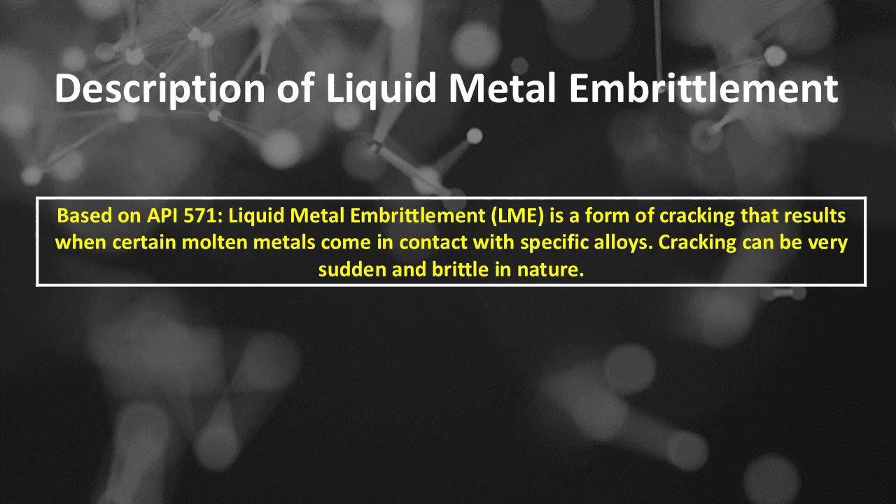Liquid metal embrittlement or LME damage mechanisms as a part of environment-assisted cracking. Description of liquid metal embrittlement damage mechanisms based on API 571. Liquid metal embrittlement or LME is a form of cracking that results when certain molten metals come in contact with specific alloys. Cracking can be very sudden and brittle in nature. Here's a comprehensive and detailed description of liquid metal embrittlement or LME damage.

Introduction. Liquid metal embrittlement is a type of environmentally assisted cracking that occurs when certain ductile metals or alloys become brittle and fracture rapidly due to the presence of specific liquid metals. Unlike traditional corrosion, which involves material degradation over time, LME involves a sudden loss of ductility and strength, leading to brittle failure.

Fundamental mechanisms of liquid metal embrittlement or LME. Number 1 is conditions for LME: susceptible material, usually ductile metals such as steels, aluminum alloys, copper alloys, nickel alloys, or titanium. Liquid metal environment, a specific liquid metal that interacts with the susceptible metal, such as mercury, zinc, cadmium, bismuth, lead, or tin.

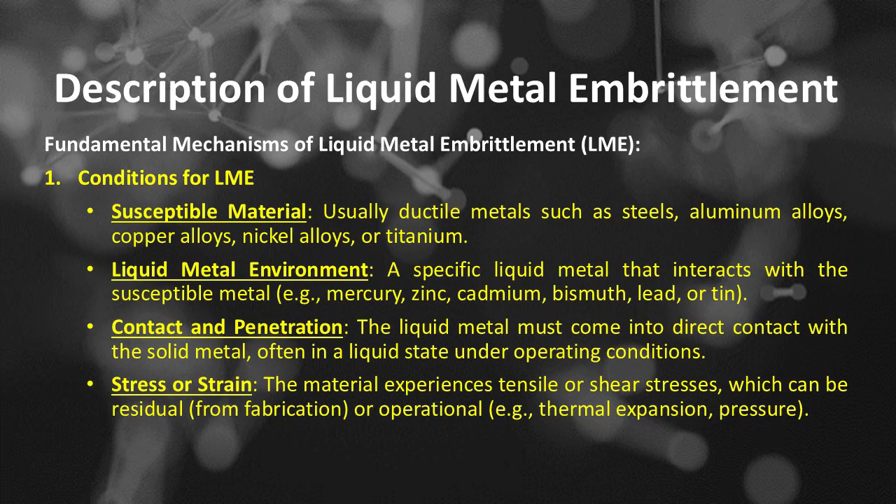Contact and penetration. The liquid metal must come into direct contact with the solid metal, often in a liquid state under operating conditions, stress or strain. The material experiences tensile or shear stresses, which can be residual, from fabrication, or operational, such as thermal expansion, pressure.

Number 2 is embrittlement process, wetting and penetration. The liquid metal wets the susceptible metal's surface and infiltrates along grain boundaries or existing flaws. Grain boundary weakening. The liquid metal segregates preferentially at grain boundaries, reducing cohesive strength. Brittle fracture. Under stress, the weakened boundaries facilitate rapid crack initiation and intergranular fracture, often with minimal plastic deformation.

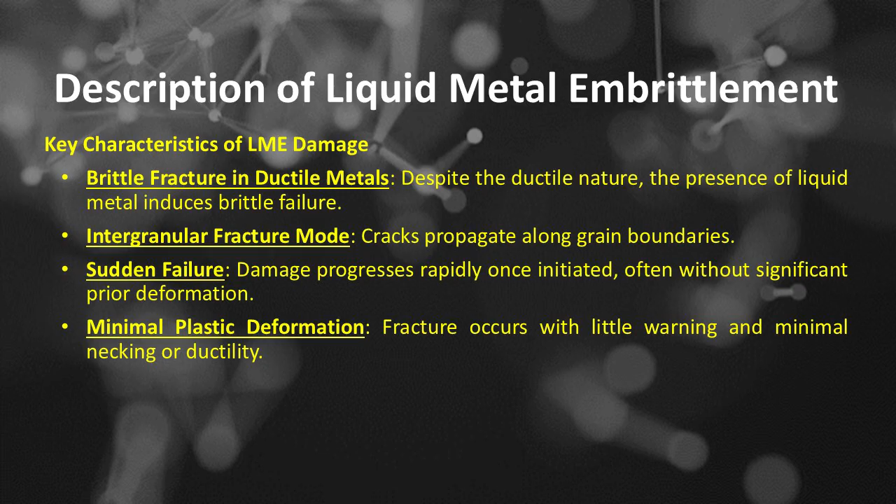Key characteristics of liquid metal embrittlement damage. Brittle fracture in ductile metals. Despite the ductile nature, the presence of liquid metal induces brittle failure. Intergranular fracture mode. Cracks propagate along grain boundaries. Sudden failure. Damage progresses rapidly once initiated, often without significant prior deformation. Minimal plastic deformation. Fracture occurs with little warning and minimal necking or ductility.

Common materials and liquid metals involved in liquid metal embrittlement are the following. Susceptible materials. Number 1 is steels and or stainless steels with common liquid metals are mercury, zinc and cadmium. Its typical environments are chemical plants, thermometers, dental amalgams. Susceptible materials. Number 2 is aluminum alloys with common liquid metals are mercury and zinc. Its typical environments are manufacturing, aerospace.

Susceptible materials. Number 3 is copper alloys with common liquid metals are mercury and zinc. Its typical environments are electronics, plumbing. Susceptible materials. Number 4 is nickel alloys with common liquid metals are mercury and lead. Its typical environments are nuclear reactors, chemical processing. Susceptible materials. Number 5 is titanium alloys with common liquid metals are mercury and bismuth. Its typical environments are marine, aerospace.

Factors influencing liquid metal embrittlement includes, number 1 is material microstructure, grain size, purity, and heat treatment influence susceptibility. Number 2 is liquid metal composition, purity and wetting characteristics affect infiltration. Number 3 is stress state, higher tensile stresses promote crack initiation. Number 4 is temperature. Elevated temperatures can enhance wetting but may also influence diffusion rates. Number 5 is exposure duration, longer contact increases risk of infiltration and damage.

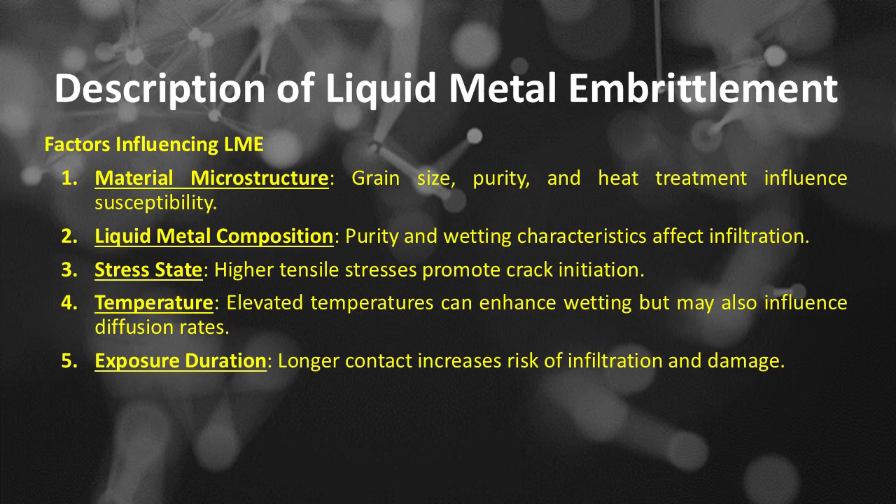Liquid metal embrittlement mechanistic details includes, number A, wettability. The liquid metal must wet the solid metal surface, which depends on surface energy and temperature. Good wettability facilitates infiltration along grain boundaries. Number B, segregation and penetration. The liquid metal penetrates microstructural features, especially grain boundaries, cracks, or inclusions. Segregation weakens the cohesive strength of boundaries, lowering fracture resistance.

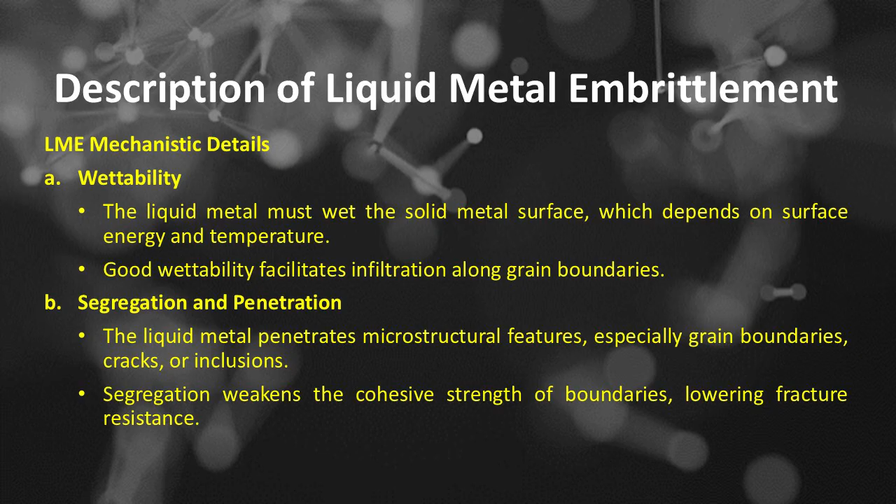Liquid metal embrittlement mechanistic details. Number C, crack initiation and propagation. Initiation often occurs at microstructural flaws, inclusions, or residual stresses. Once initiated, cracks propagate rapidly along grain boundaries, leading to brittle fracture.

Manifestations and damage features of liquid metal embrittlement includes intergranular fracture surface, characteristic appearance with brittle, granular features along grain boundaries, crack nucleation sites, microstructural flaws, inclusions, or areas of residual stress. Sudden failure, no significant prior warning, failure occurs rapidly once critical penetration occurs.

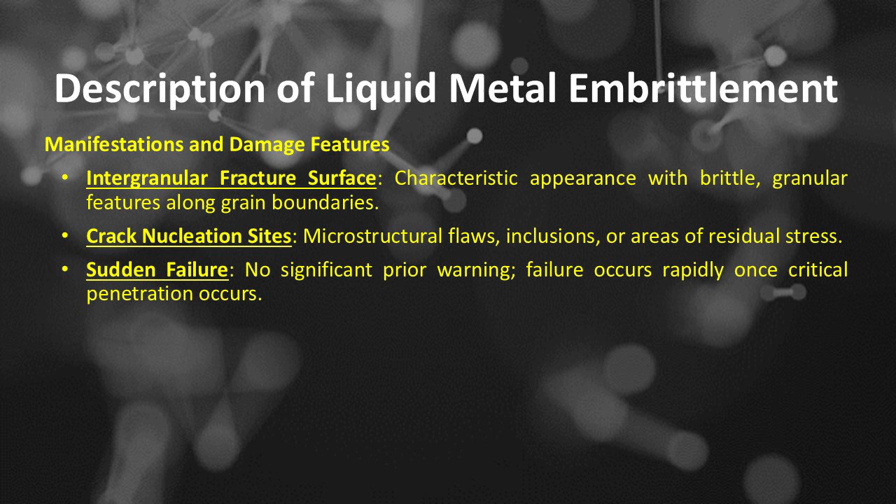Detection and identification method for liquid metal embrittlement includes but not limited to: number 1 is fractographic analysis. Examination of fracture surfaces reveals intergranular brittle features characteristic of LME. Number 2 is microscopy. SEM, scanning electron microscopy, can identify grain boundary infiltration and microstructural features. Number 3 is chemical analysis. Energy dispersive X-ray spectroscopy, EDS, can detect liquid metal residues at crack sites. Number 4 is non-destructive testing. NDT ultrasonic testing, radiography, or dye penetrant may detect subsurface or surface flaws.

Prevention and control measures for liquid metal embrittlement include but are not limited to: number 1, material selection. Use materials resistant to LME, such as avoiding susceptible alloys and selecting compatible metals.

Number 2 is environmental control. Minimize contact with liquid metals, employ barriers or coatings.

Number 3 is design modifications. Reduce residual stresses, avoid sharp corners, and implement stress relief.

Number 4 is operational controls. Limit exposure time and temperature in environments containing liquid metals.

Number 5 is inspection and monitoring. Regular inspections, especially after exposure, to detect early crack formation.

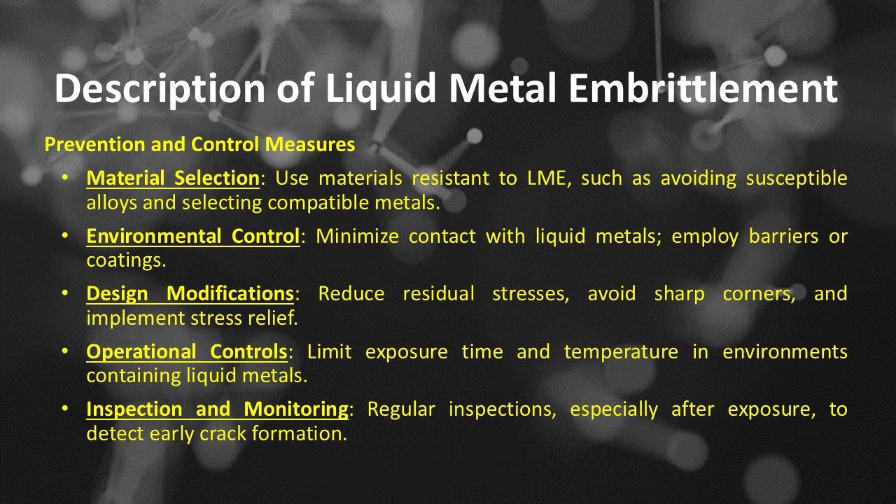Liquid metal embrittlement, or LME, is a damaging phenomenon where certain ductile metals become brittle and fracture rapidly when they come into contact with specific liquid metals under stress. It involves infiltration of liquid metal along grain boundaries, weakening the microstructure, and leading to intergranular brittle failure with minimal plastic deformation.

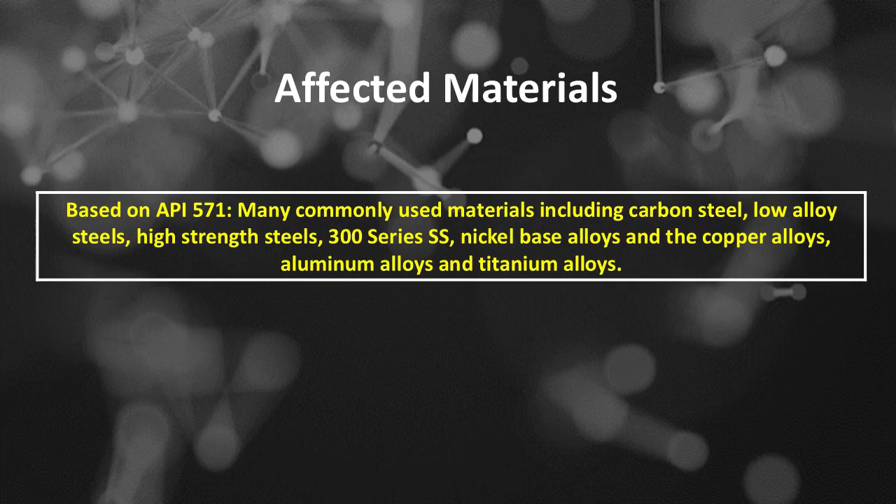Understanding the specific susceptible materials, liquid metals involved, environmental factors, and microstructural conditions is essential for preventing and managing LME damage. Liquid metal embrittlement affected materials based on API 571: many commonly used materials including carbon steel, low alloy steels, high-strength steels, 300 series SS, nickel base alloys, copper alloys, aluminum alloys, and titanium alloys.

Here's a detailed explanation of materials affected by liquid metal embrittlement, or LME. Introduction: LME is a phenomenon where certain ductile metals or alloys become brittle and fracture suddenly upon exposure to specific liquid metals under stress. Not all materials are susceptible. The likelihood of LME depends heavily on the material's microstructure, composition, and environmental interactions.

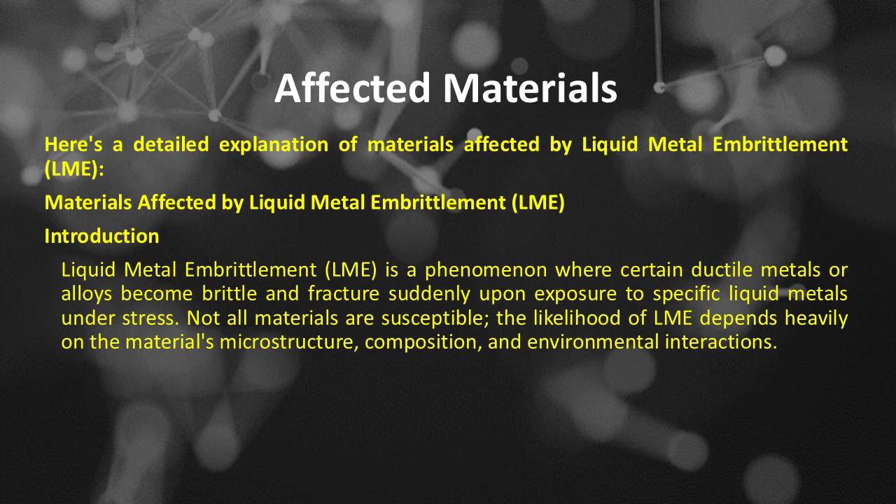Primary materials affected by liquid metal embrittlement include: number 1, steels, including carbon steels and stainless steels. Steel susceptibility: many steels, especially high-strength, low-ductility variants, are vulnerable. Austenitic stainless steels, like 304, 316, can be susceptible under certain conditions.

The mechanism of liquid metal embrittlement in steel materials: liquid zinc, mercury, or cadmium can infiltrate along grain boundaries, causing intergranular brittle failure. High residual stresses or tensile stresses exacerbate susceptibility.

Primary materials, number 2, is aluminum alloys. Its susceptibility includes aluminum alloys, particularly those with high purity or certain microstructures, can be affected. Mercury is a common liquid metal involved. The mechanism of liquid metal embrittlement in aluminum alloys: mercury wets aluminum surfaces, infiltrates grain boundaries, leading to embrittlement.

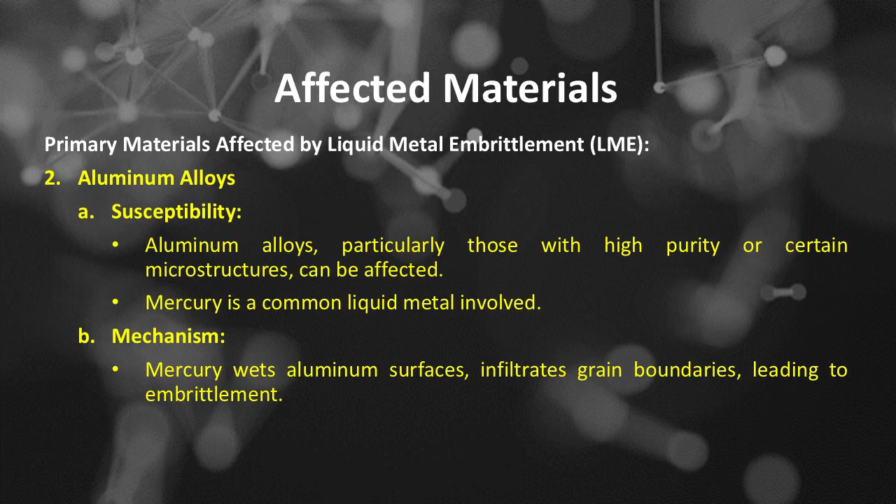Primary materials, number 3, is copper and copper alloys. Its susceptibility includes copper, brass, and bronze alloys, which are vulnerable to mercury-induced embrittlement. Applications of copper and copper alloys are mostly in plumbing, electrical components, and decorative items. The mechanism of liquid metal embrittlement in copper and copper alloys: mercury penetrates along grain boundaries, causing intergranular fractures.

Primary materials, number 4, is nickel and nickel-based alloys. Its susceptibility includes certain nickel alloys, especially those with high purity or specific microstructural features, which can be susceptible to mercury or cadmium LME. Applications of nickel and nickel-based alloys are mostly in nuclear reactors and chemical processing equipment. The mechanism of liquid metal embrittlement in these alloys, similar to steels, is infiltration along grain boundaries which weakens the structure.

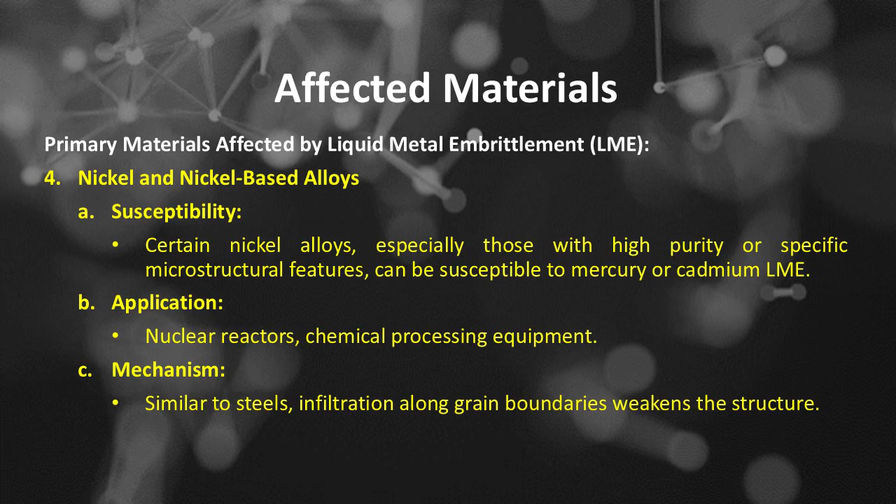Primary materials, number 5, is titanium and titanium alloys. Its susceptibility includes being less commonly affected, but it can occur in environments with mercury or other liquid metals. Applications of titanium and titanium alloys are mostly in marine environments and aerospace components.

Here are additional factors influencing material susceptibility. The first is microstructure factors: fine-grained materials tend to be more susceptible because grain boundaries provide pathways for infiltration. The presence of microstructural flaws, inclusions, or residual stresses increases risk.

The second is material purity: high-purity materials with fewer grain boundary precipitates are more vulnerable, and alloying elements can influence wettability and infiltration. The third is stress state: applied tensile stresses or residual stresses can promote crack initiation and propagation in susceptible materials.

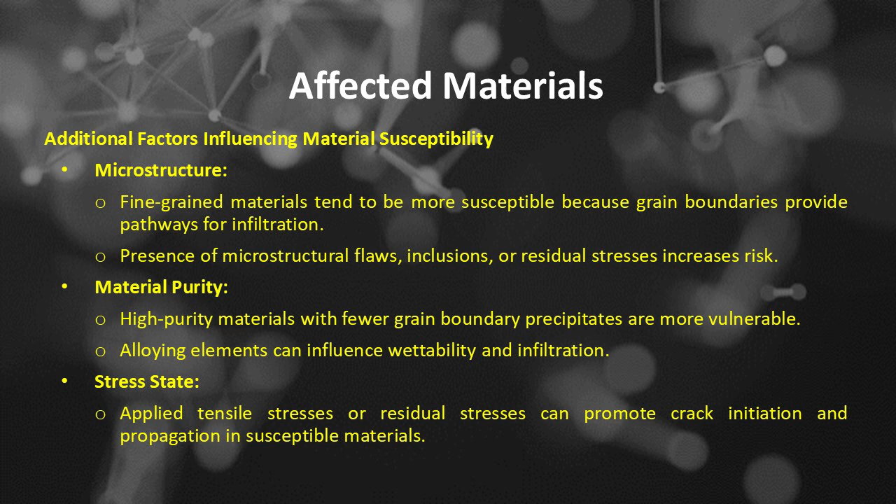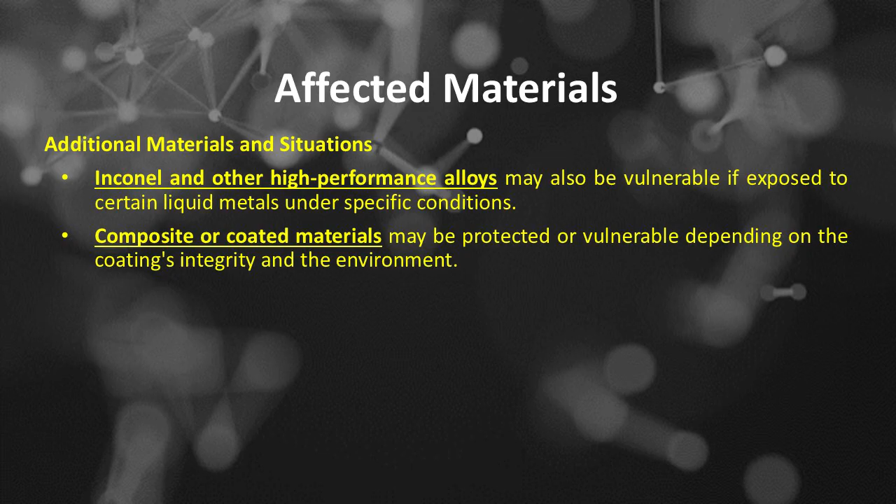Additional materials and situations include: Inconel and other high-performance alloys may also be vulnerable if exposed to certain liquid metals under specific conditions. Composite or coated materials may be protected or vulnerable depending on the coating's integrity and the environment.

In essence, the primary materials susceptible to LME are ductile metals and alloys that have microstructures with abundant grain boundaries, are in contact with specific liquid metals like mercury, zinc, cadmium, lead, bismuth, or tin, and experience tensile stresses, residual stresses, or environmental conditions favoring infiltration. Understanding the susceptibility of these materials is vital for designing systems to prevent LME damage, such as avoiding exposure to liquid metals, applying protective coatings, or selecting alternative materials.

Liquid metal embrittlement, or LME, damage mechanisms.

Critical factors based on API 571: A, LME occurs in very specific combinations of metals in contact with low melting point metals such as zinc, mercury, cadmium, lead, copper, and tin. Typical combinations of industrial significance are shown in Table 4-9.

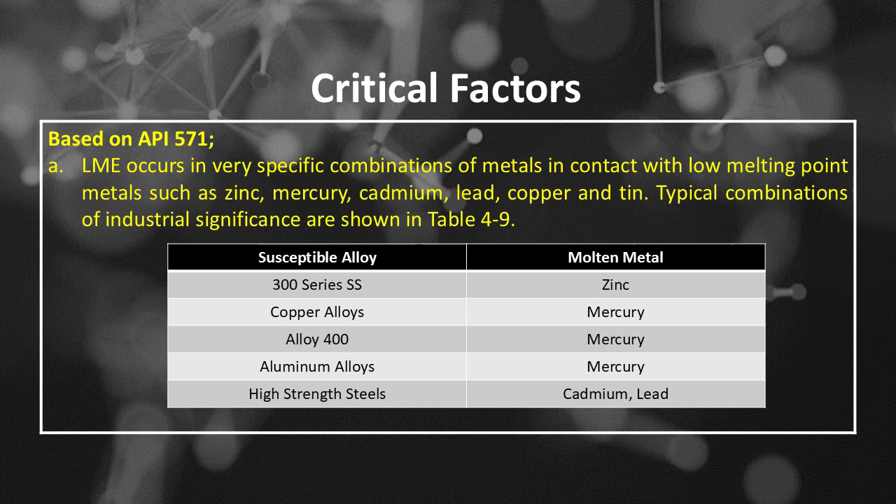300 series SS susceptible to LME when combined with zinc as molten metal. Copper alloys susceptible to LME when combined with mercury. Alloy 400 susceptible to LME when combined with mercury. Aluminum alloys susceptible to LME when combined with mercury. High-strength steel susceptible to LME when combined with cadmium and/or lead as molten metal.

B, high tensile stress promotes cracking. However, cracking can initiate simply through contacting the molten metal with the susceptible alloy. Very small quantities of the low melting point metal are sufficient to cause LME.

C, tensile stress contributes to crack propagation rates. Cracking under load can be extremely rapid such that cracks may pass through the wall within seconds of contact with the molten metal. D, cracking can occur after long periods of time when contaminated surfaces are exposed to liquid metals. E, a susceptible metal in contact with a low melting metal at low temperatures may crack later when the temperature rises above the melting temperature of the low melting alloy.

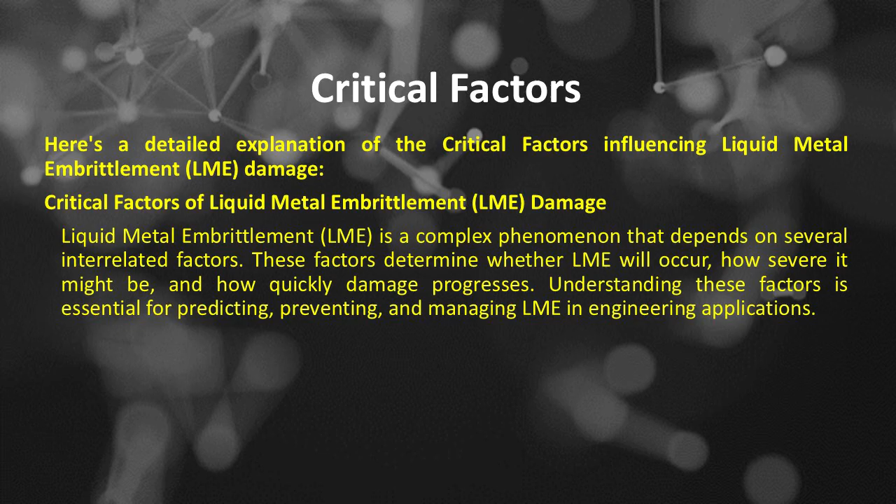Here's a detailed explanation of the critical factors influencing liquid metal embrittlement, or LME damage. Liquid metal embrittlement is a complex phenomenon that depends on several interrelated factors. These factors determine whether LME will occur, how severe it might be, and how quickly damage progresses. Understanding these factors is essential for predicting, preventing, and managing LME in engineering applications.

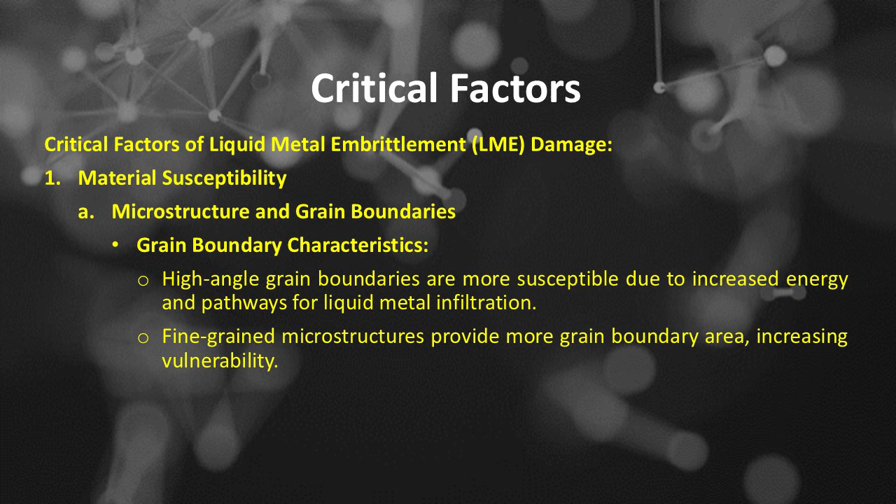Critical factors of liquid metal embrittlement. Number 1, material susceptibility, includes A, microstructure and grain boundaries. High-angle grain boundaries are more susceptible due to increased energy and pathways for liquid metal infiltration. Fine-grained microstructures provide more grain boundary area, increasing vulnerability.

Microstructural defects such as inclusions, microvoids, or residual stresses at grain boundaries facilitate crack initiation. Microstructural heterogeneities can act as sites for liquid metal segregation.

B, material composition and purity. Alloy composition: certain alloying elements can either inhibit or promote wetting and infiltration. For example, high-purity metals may be more susceptible due to fewer impurities blocking infiltration pathways.

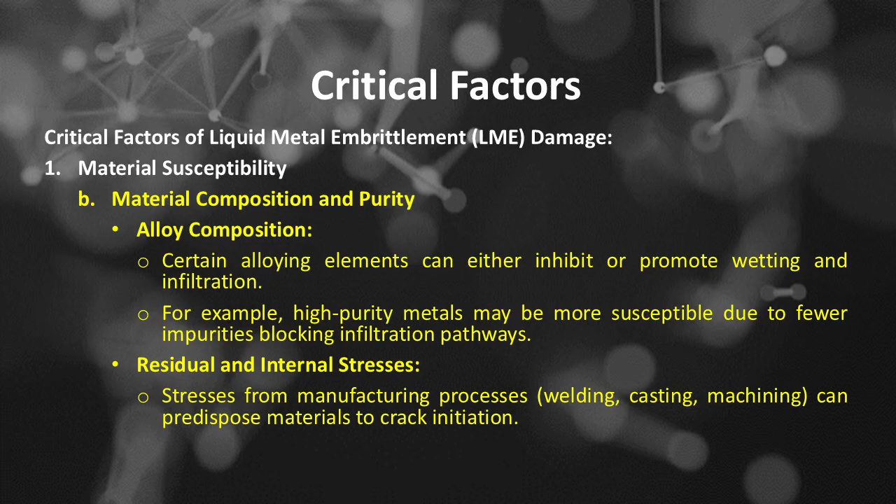Residual and internal stresses from manufacturing processes—welding, casting, machining—can predispose materials to crack initiation. Mechanical properties include ductility and toughness: less ductile, high-strength materials are more prone to brittle fracture once embrittled. Hardness and strength: higher strength can localize stresses at microstructural flaws, aiding crack nucleation.

Critical factors of LME damage. Number 2, type and properties of the liquid metal. A, wetting behavior: wettability, the ability of the liquid metal to spread over and adhere to the solid metal surface, is crucial. Good wettability ensures infiltration along grain boundaries. Surface tension: lower surface tension promotes wetting and penetration.

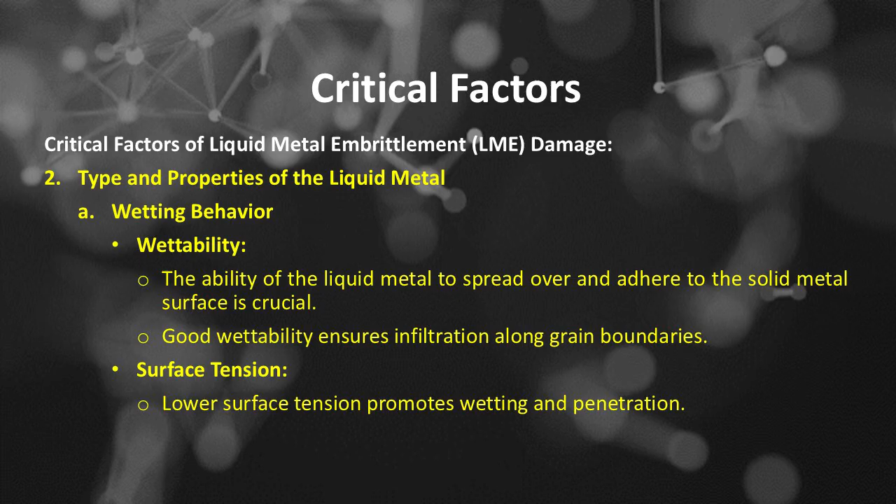Type and properties of the liquid metal. B, chemical compatibility and segregation tendency. The liquid metal's chemical affinity for the solid influences infiltration. For example, mercury readily wets aluminum and steels, making them more vulnerable.

C, melting point and viscosity, temperature dependence. Elevated temperatures improve wetting but also increase diffusion rates. Liquid metals with low melting points or that are liquid at operating temperatures can infiltrate more easily.

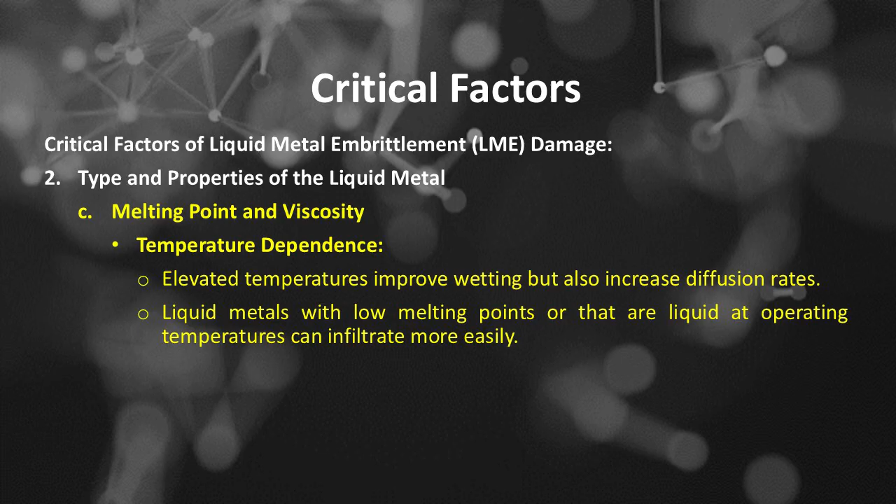Critical factors of LME damage. Number 3, environmental and operating conditions, includes A, temperature. High temperatures enhance wetting and infiltration but can also accelerate diffusion of liquid metal into grain boundaries. Temperature gradients and differential thermal expansion can induce stresses, promoting crack initiation.

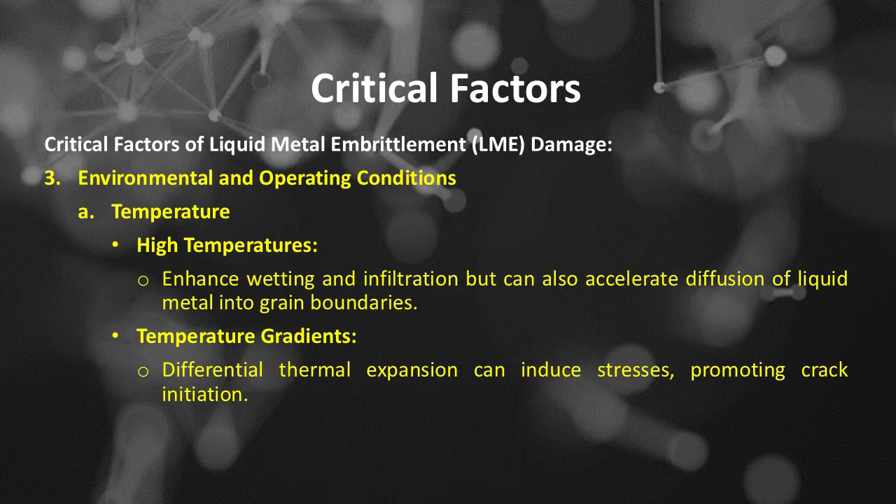Environmental and operating conditions factors. B, mechanical stress: applied tensile stress is essential for crack propagation. Stress helps open grain boundaries for infiltration. Residual stress remaining from manufacturing or fabrication processes can predispose to LME.

Environmental and operating conditions factors. C, stress state: tensile versus compressive. Tensile stresses favor crack initiation and growth, while compressive stresses generally inhibit crack propagation. D, exposure duration: longer exposure to liquid metal increases infiltration depth, weakening the microstructure and increasing fracture risk.

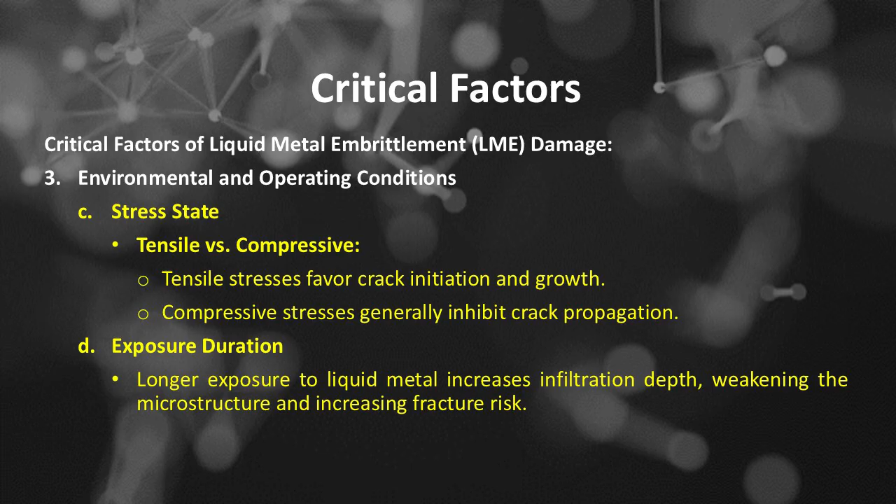Critical factors of LME damage. Number 4, microstructural and external factors, includes A, surface condition: surface roughness, oxidation, or coatings can influence wettability and infiltration. Corroded or oxidized surfaces may either hinder or promote infiltration depending on the chemistry.

Microstructural and external factors. B, presence of microstructural flaws, microcracks, voids, or inclusions act as initiation sites where liquid metal can penetrate. C, alloying elements and impurities. Certain impurities can either block or facilitate infiltration. For example, oxide layers may act as barriers or pathways for infiltration depending on their nature.

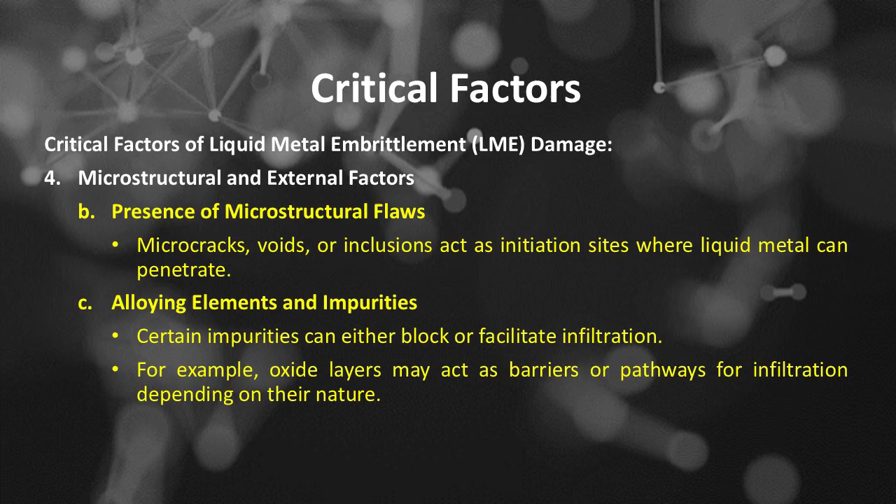The critical factors influencing LME damage are interdependent. The likelihood and severity of embrittlement depend on the combined effects of material susceptibility, the properties of the liquid metal, environmental conditions, and mechanical stresses. Altering or controlling these factors, such as material selection, environment, stress management, and surface treatments, can effectively mitigate the risk of LME-induced failures.

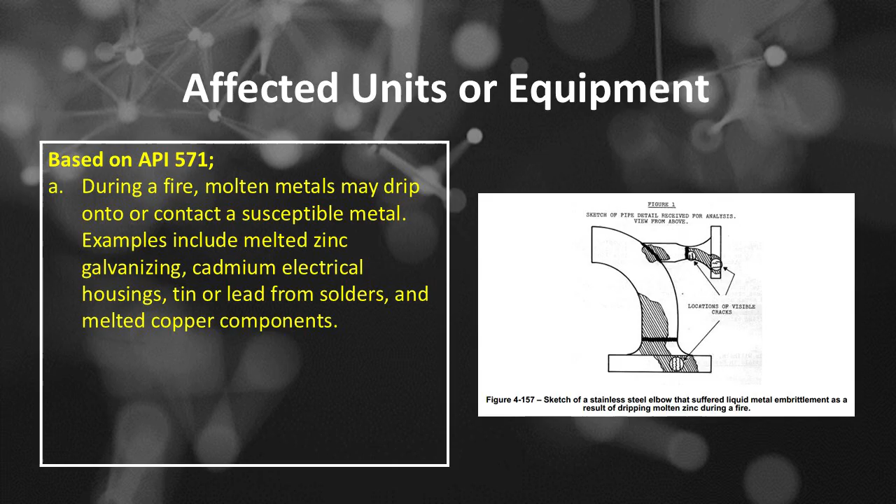Liquid metal embrittlement damage affected units or equipment based on API 571. A, during a fire, molten metals may drip onto or contact a susceptible metal. Examples include melted zinc galvanizing, cadmium electrical housings, tin or lead from solders, and melted copper components.

B, LME can occur in any location where the LME couples are found. A common example is 300 series SS piping or vessels in contact with, or previously rubbed against, galvanized steel.

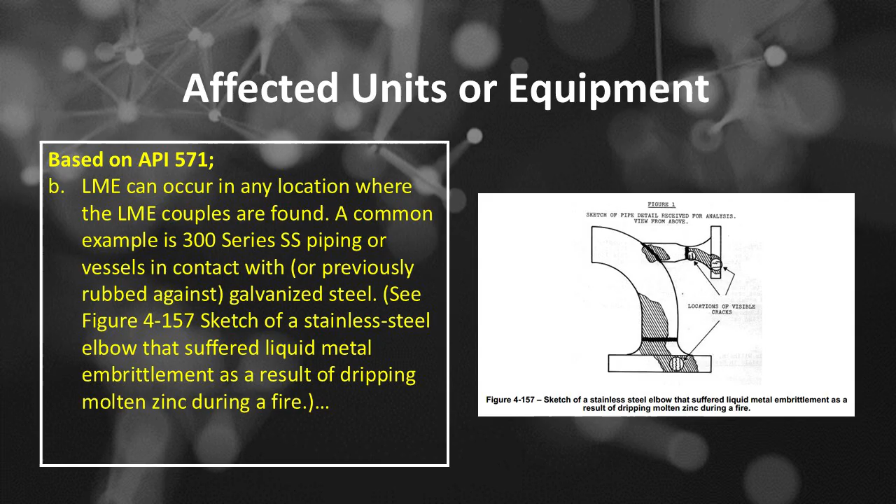C. In refineries, mercury is found in some crude oils and can condense in the atmospheric tower overhead system, thereby embrittling brass, alloy 400, titanium or aluminum exchanger components.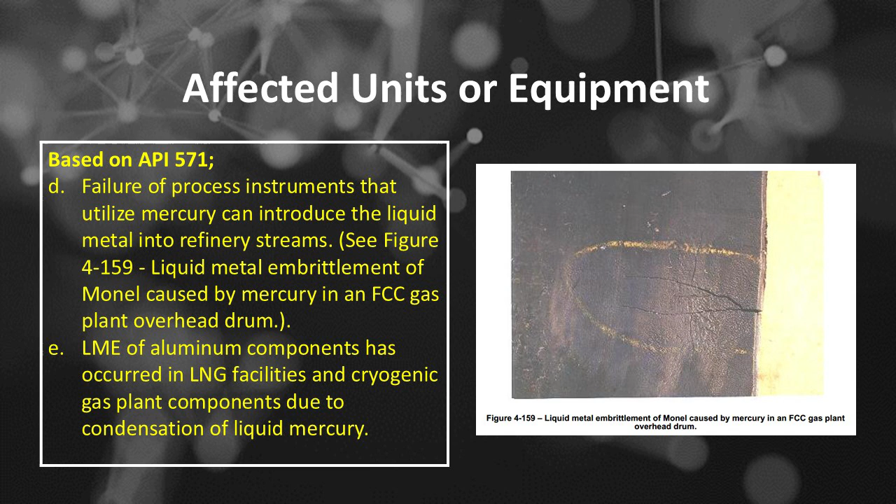E. LME of aluminum components has occurred in LNG facilities and cryogenic gas plant components due to condensation of liquid mercury. Here's a detailed explanation of the units or equipment affected by liquid metal embrittlement, LME, damage.

LME can compromise a wide range of industrial units and equipment, especially those involving the contact of susceptible materials with liquid metals under stress. The specific equipment affected depends on the operational environment, materials used, and exposure conditions.

Affected units and equipment in liquid metal embrittlement, LME, damage, includes: 1, nuclear reactor components, includes A, fuel cladding and structural materials such as metal tubes, plates, or structural elements that contain or support nuclear fuel. Materials used commonly: stainless steels, zirconium alloys, or other high-strength alloys.

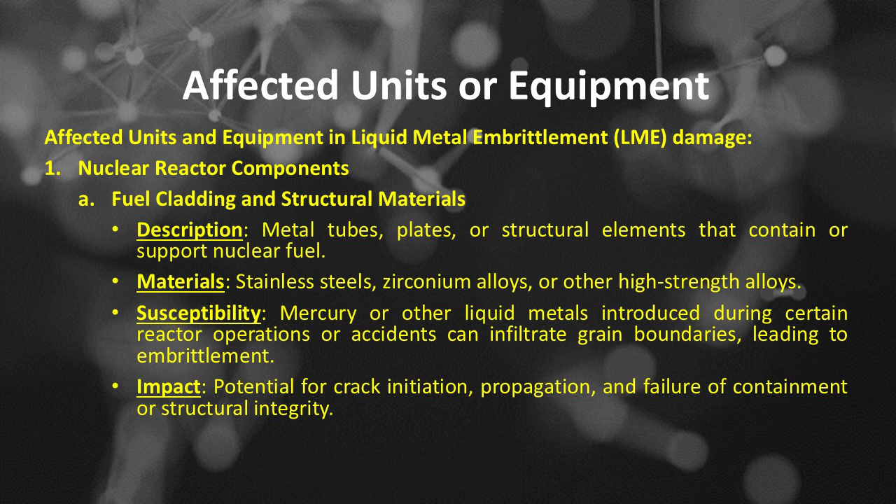Fuel cladding and structural susceptibility for these materials would be mercury or other liquid metals introduced during certain reactor operations or accidents can infiltrate grain boundaries, leading to embrittlement. The impact of fuel cladding and structural materials is potential for crack initiation, propagation, and failure of containment or structural integrity. B, reactor coolant systems such as pipelines, heat exchangers, and valves.

Materials used commonly: steel alloys, nickel-based alloys. Reactor coolant system susceptibility for these materials would be exposure to liquid metals like mercury or lead bismuth eutectic in advanced reactor designs or experimental setups. The impact on reactor coolant systems is corrosion, cracking, and leaks.

Affected units and equipment in liquid metal embrittlement, LME, damage. Number 2, chemical and processing equipment, includes A, heat exchangers and condensers. Components with metal surfaces in contact with liquid metals such as mercury or zinc. Susceptibility in chemical processing involving liquid metal catalysts or coolants. Impact of LME to heat exchangers and condensers is reduced mechanical strength, leading to leaks or catastrophic failure.

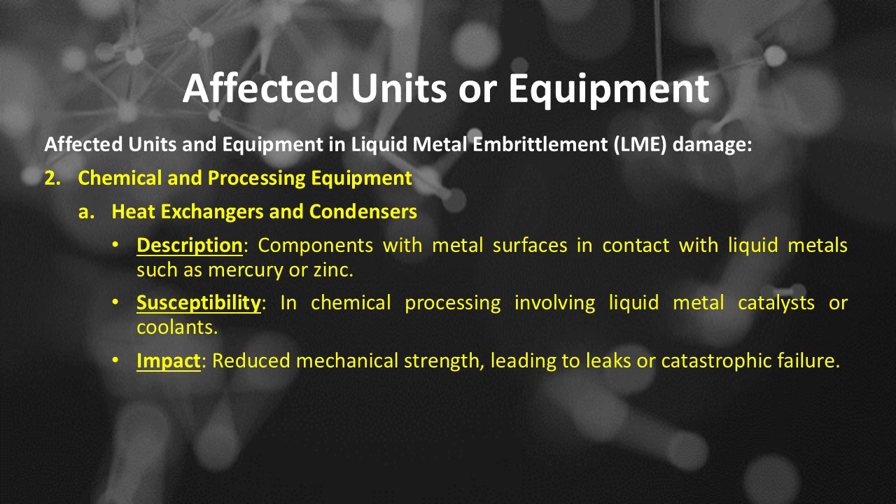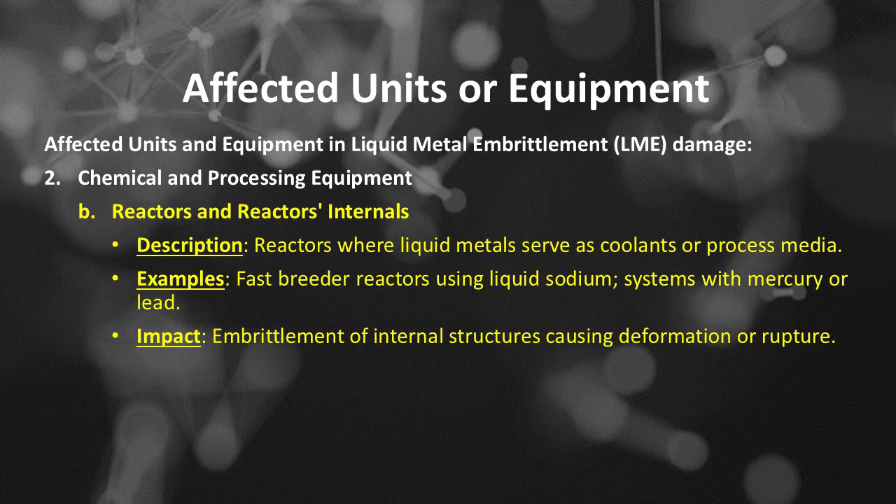Chemical and processing equipment. B, reactors and reactor internals. Reactors where liquid metals serve as coolants or process media. Examples: fast breeder reactors using liquid sodium, systems with mercury or lead. Impact: embrittlement of internal structures causing deformation or rupture.

Affected units and equipment in liquid metal embrittlement, LME, damage. Number 3, aerospace and marine equipment, includes A, marine propulsion systems. Components exposed to mercury or other liquid metals in certain marine applications. Susceptibility: mercury used historically in some marine instrumentation.

Impact: structural failure due to embrittlement. Aerospace and marine equipment, specifically aerospace components—high-performance alloys exposed to liquid metal environments during manufacturing or operation. Impact: microcracking and potential failure under operational stresses. Affected units and equipment in liquid metal embrittlement damage.

Number 4, electronics and instrumentation, includes: A, electronic connectors and switches—components where mercury is used in switches or thermometers. Susceptibility: mercury infiltration can cause embrittlement of contact points. Impact: malfunction or failure of electrical components.

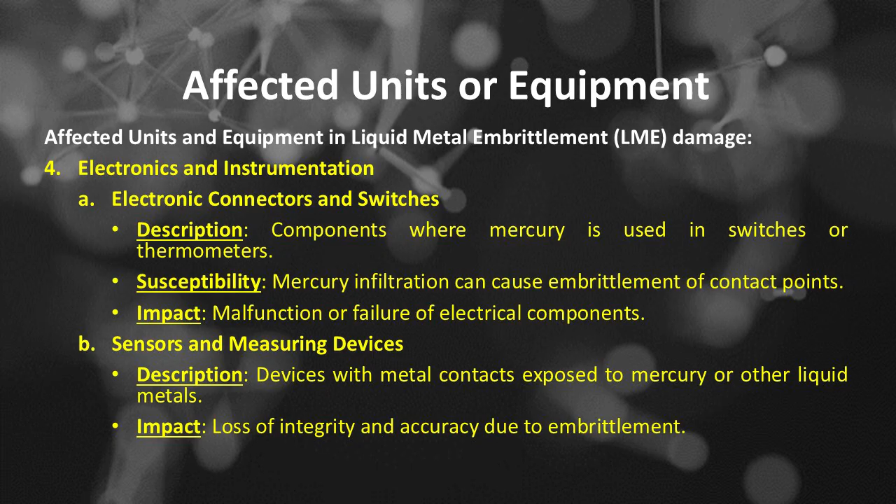Electronics and instrumentation, B, sensors and measuring devices—devices with metal contacts exposed to mercury or other liquid metals. Impact: loss of integrity and accuracy due to embrittlement. Affected units and equipment in liquid metal embrittlement damage.

Number 5, manufacturing and fabrication units, includes: A, welding and assembly equipment—equipment used to assemble or repair components made of susceptible metals. Susceptibility: exposure to liquid metals during cleaning or manufacturing processes. Impact: microstructural weakening, leading to premature failure.

Manufacturing and fabrication units, B, coating and surface treatment units—systems applying coatings to protect against corrosion. Impact: interaction with liquid metals can induce embrittlement in coated materials. Affected units and equipment in liquid metal embrittlement damage.

Number 6, special environments and experimental facilities, includes: A, laboratories handling liquid metals—facilities working with mercury, lead, bismuth, or zinc. Susceptibility: equipment, containment vessels, and transfer lines. Impact: structural degradation, leaks, or accidents. Special environments and experimental facilities.

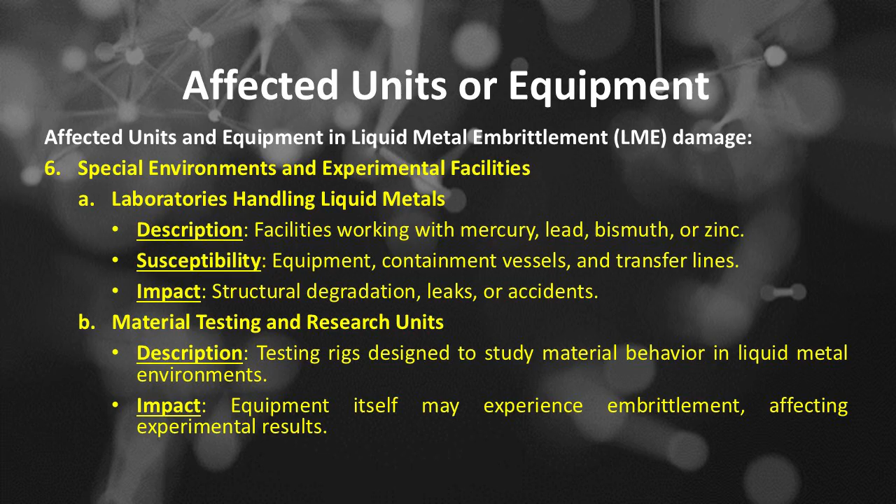Number B, material testing and research units—testing rigs designed to study material behavior in liquid metal environments. Impact: the equipment itself may experience embrittlement, affecting experimental results.

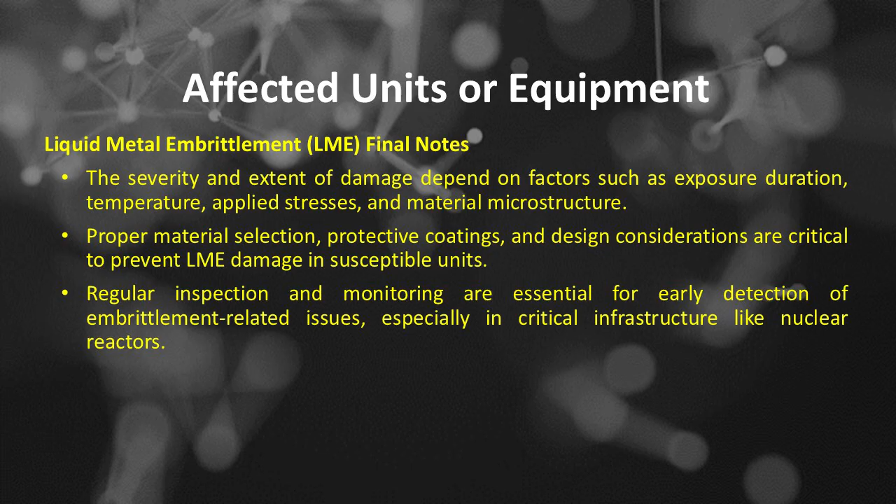Liquid metal embrittlement, final notes: the severity and extent of damage depend on factors such as exposure duration, temperature, applied stresses, and material microstructure. Proper material selection, protective coatings, and design considerations are critical to prevent LME damage in susceptible units. Regular inspection and monitoring are essential for early detection of embrittlement-related issues, especially in critical infrastructure like nuclear reactors.

Liquid metal embrittlement: appearance or morphology of damage based on API 571. A, damage resulting from LME will appear as brittle cracks in an otherwise ductile material. LME can only be confirmed through metallography by the presence of intergranular cracks, usually filled with the low-melting metal. B, techniques such as spectrographic analysis may be required to confirm the presence of the molten metal species.

Here's a detailed explanation of the appearance or morphology of liquid metal embrittlement, LME, damage. LME manifests as characteristic microstructural features and macroscopic surface indications that reflect the underlying brittle fracture process induced by liquid metal infiltration. Understanding these morphological features is essential for diagnosing LME-related failures and distinguishing them from other types of damage.

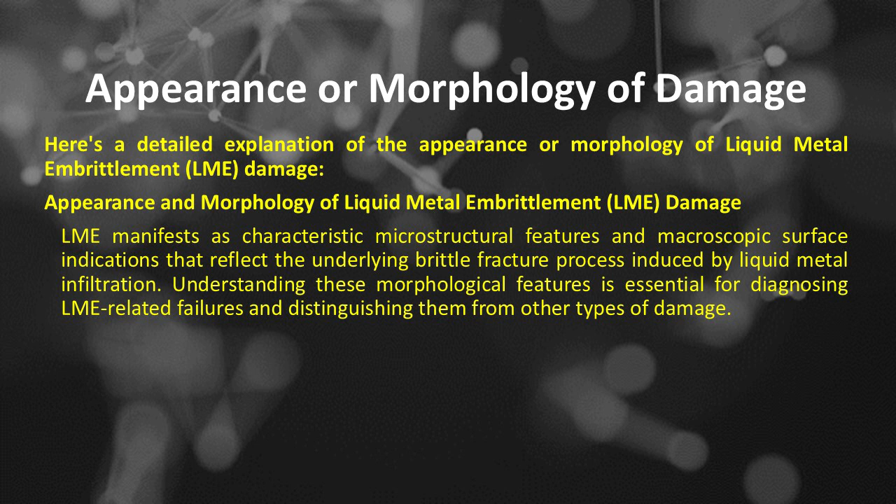Appearance and morphology of liquid metal embrittlement damage includes: 1, macroscopic features, including A, brittle fracture surfaces. The appearance of brittle fracture surfaces are flat, shiny, and granular, typical of brittle fracture, often lacking ductile features such as ductile dimples characteristic of ductile failure. The fracture surface may be intergranular, along grain boundaries, or transgranular, through grains, depending on the mode of embrittlement.

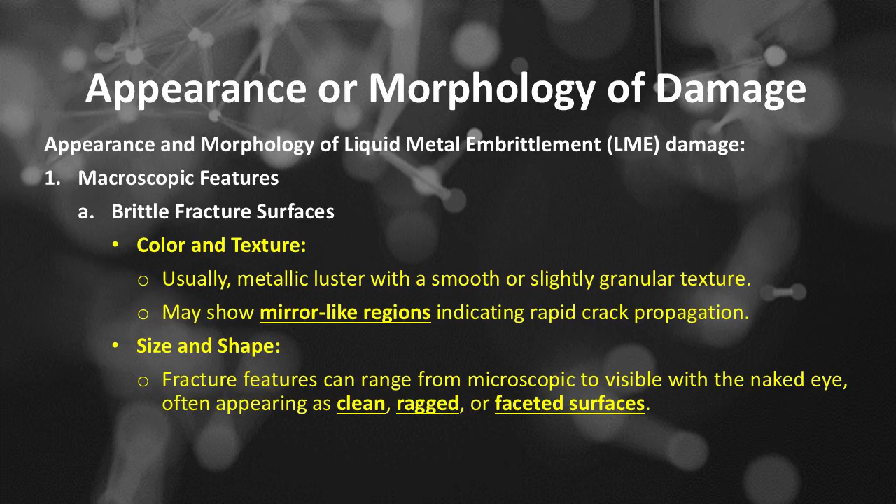The color and texture of brittle fracture surfaces are usually metallic luster with a smooth or slightly granular texture, may show mirror-like regions indicating rapid crack propagation. The size and shape of brittle fracture surfaces range from microscopic to visible with the naked eye, often appearing as clean, ragged, or faceted surfaces.

B of macroscopic features is surface cracks and flaws. The appearance of surface cracks and flaws: cracks may originate at surface defects, microvoids, or inclusions. In some cases, intergranular cracks run along grain boundaries, giving a network-like appearance. The pattern of surface cracks and flaws is often interconnected, forming a network of microcracks or macrocracks. Cracks may be parallel to the surface or perpendicular, depending on stress and infiltration pathways.

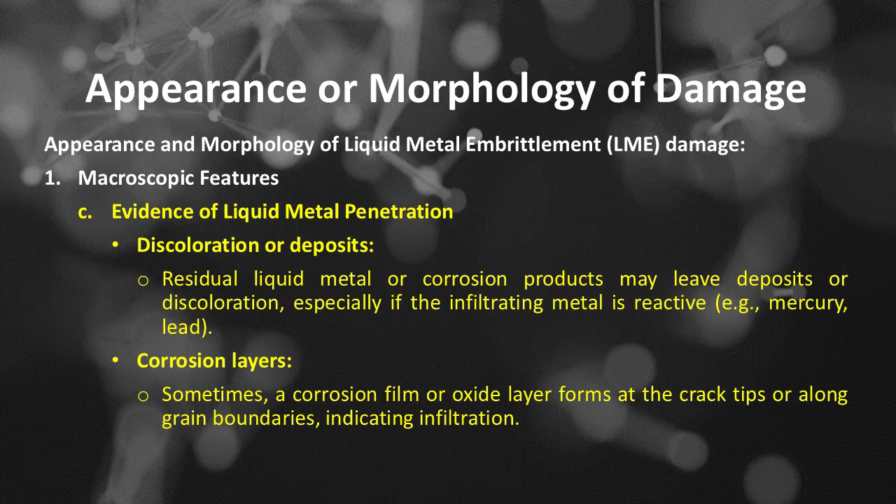C of macroscopic features is evidence of liquid metal penetration. The evidence is discoloration or deposits—residual liquid metal or corrosion products may leave deposits or discoloration, especially if the infiltrating metal is reactive, such as mercury or lead. The evidence in corrosion layers is sometimes a corrosion film or oxide layer that forms at the crack tips or along grain boundaries, indicating infiltration.

The appearance and morphology of liquid metal embrittlement damage, number 2, is microstructural features, including A, grain boundary embrittlement, including intergranular fracture mode—cracks propagate along grain boundaries, which appear widened or decohesioned. Grain boundaries may show voids or microcracks at the interface. The features of grain boundary embrittlement are: intergranular corrosion or attack zones are often evident under microscopy.

Grain boundaries may be decorated with residual liquid metal or corrosion products.

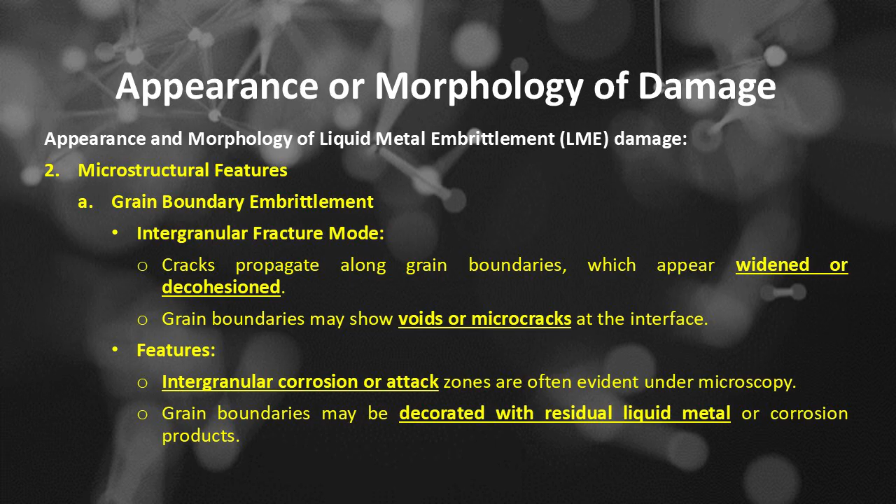Microstructural features, number B: microvoids and microcracks. The appearance of microvoids are small, spherical cavities within the grains or along boundaries. The appearance of microcracks are often intergranular or transgranular.

Distribution of microvoids and microcracks includes concentration near the surface or at grain boundary triple points, and may coalesce to form larger cracks.

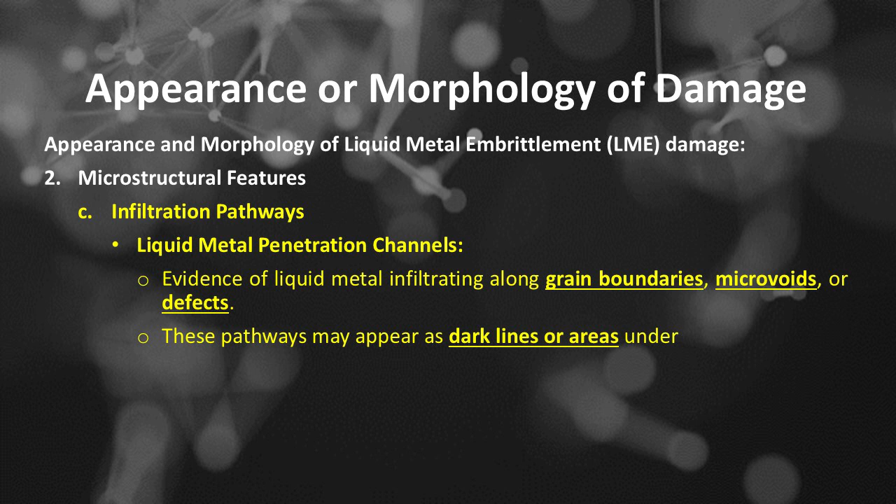Microstructural features number C, infiltration pathways: liquid metal penetration channels, evidence of liquid metal infiltrating along grain boundaries, microvoids, or defects. These pathways may appear as dark lines or areas under examination.

Microstructural features number D, fracture surface morphology. The features of fracture surface morphology include: characterized by cleavage planes and step-like features typical of brittle fracture, may show dimpled regions if partial ductility exists, but predominantly brittle features dominate.

Fracture mode of fracture surface morphology includes: intergranular fracture dominates in embrittled regions. Transgranular brittle fracture may also occur, often with faceted features.

Number 3 of appearance and morphology of liquid metal embrittlement damage is specific morphological indicators of LME. First feature is intergranular cracking, described as cracks follow grain boundaries, and the significance indicator is signature of embrittlement along grain boundaries via liquid metal infiltration.

Next feature is smooth, mirror-like fracture surfaces, described as rapid, brittle crack propagation, and the significance indicator is indicates brittle failure mode typical of LME.

Next feature is microvoids and microcracks, described as tiny cavities and cracks within grains or boundaries, and the significance indicator is initiation sites for fracture.

Next feature is residual liquid metal deposits, described as presence of metallic or corrosion deposits at cracks, and the significance indicator is evidence of infiltration and embrittlement process.

Next feature is widened grain boundaries, described as boundaries appear decohesioned or widened, and the significance indicator is result of liquid metal weakening the boundary strength.

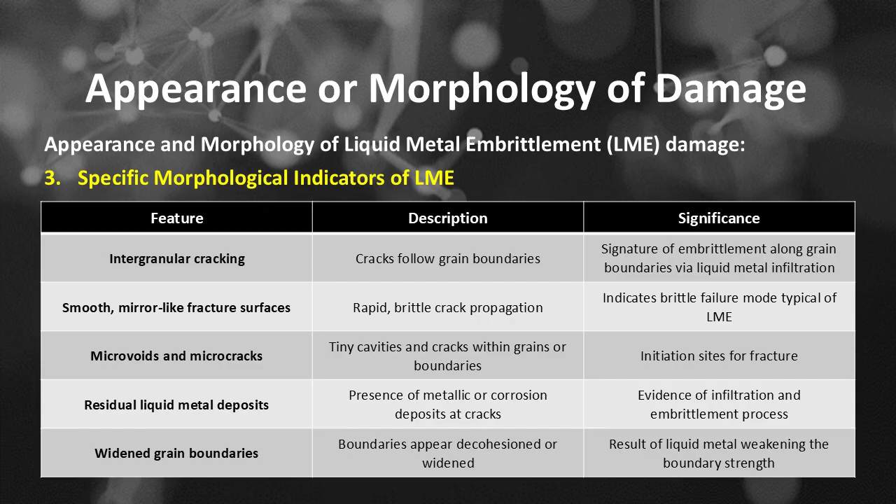Number 4 of appearance and morphology of liquid metal embrittlement damage is visual and microscopic examination, includes number A, optical microscopy: reveals surface features such as cracks, grain boundary decohesion, and fracture morphology.

Number B, scanning electron microscopy or SEM. This provides high-resolution images showing grain boundary attack, microvoids and crack propagation paths, and residual liquid metal deposits.

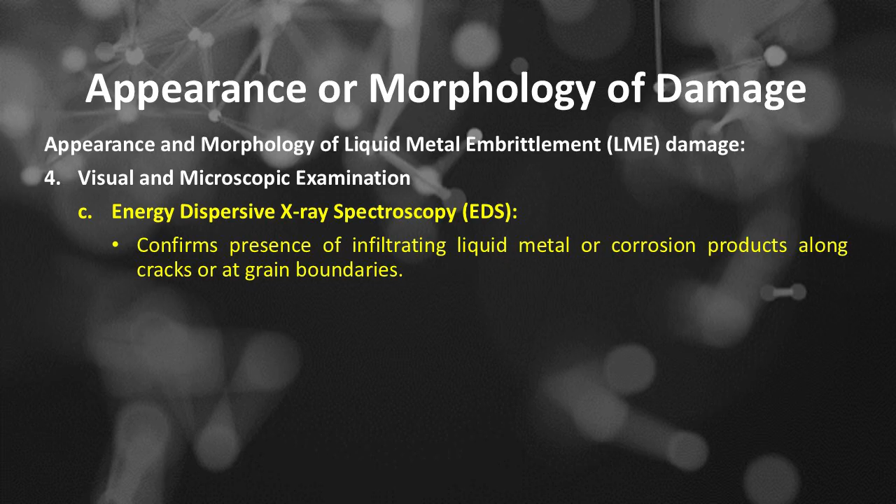Visual and microscopic examination number C, energy dispersive X-ray spectroscopy or EDS, confirms presence of infiltrating liquid metal or corrosion products along cracks or at grain boundaries.

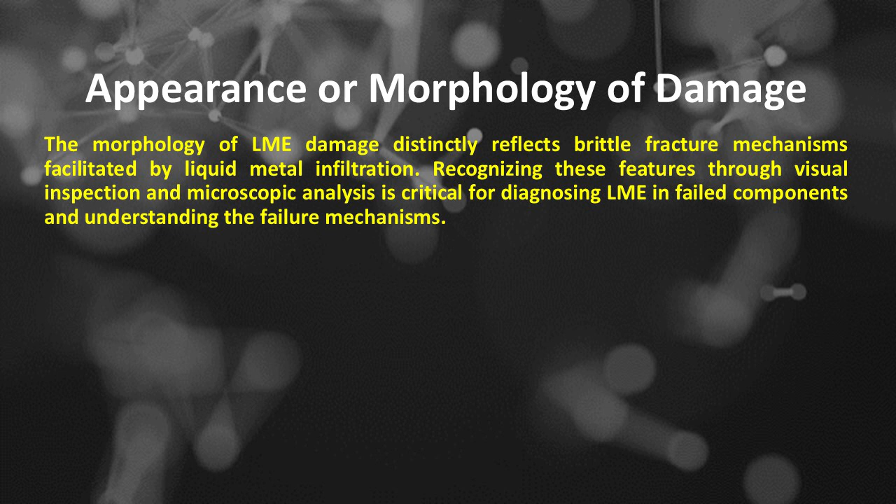The morphology of LME damage distinctly reflects brittle fracture mechanisms facilitated by liquid metal infiltration. Recognizing these features through visual inspection and microscopic analysis is critical for diagnosing LME in failed components and understanding the failure mechanisms. Liquid metal embrittlement or LME damage prevention and mitigation, based on API 571, number A: LME can only

be prevented by protecting metal substrates from coming into contact with the low melting metal. For example, galvanized steel components should not be welded to 300 series SS. 300 series SS should be protected to avoid contact with galvanized components and overspray from zinc and inorganic zinc coatings.

Number B, once cracking from LME has initiated, grinding out the affected area is not an acceptable fix.

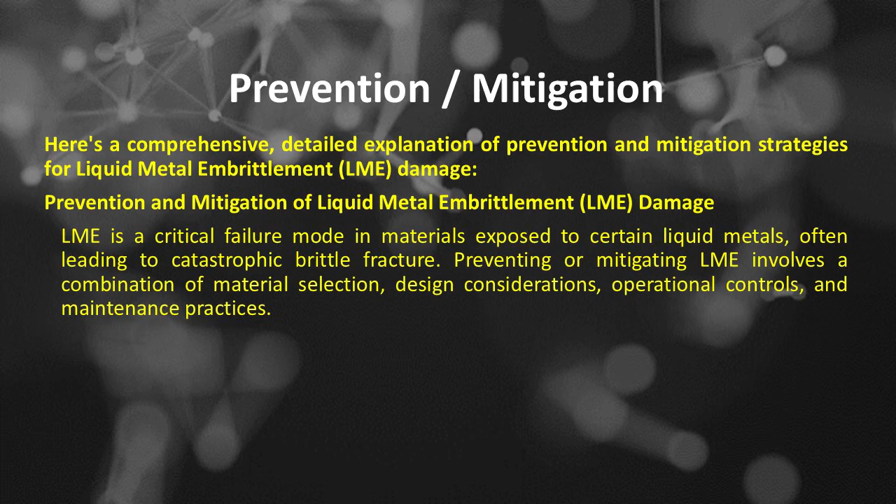Here's a comprehensive, detailed explanation of prevention and mitigation strategies for liquid metal embrittlement or LME damage. LME is a critical failure mode in materials exposed to certain liquid metals, often leading to catastrophic brittle fracture. Preventing or mitigating LME involves a combination of material selection, design considerations, operational controls, and maintenance practices.

Prevention and mitigation of liquid metal embrittlement or LME damage includes number 1, material selection and alloy design, includes number A, use of resistant materials: avoid susceptible alloys. Materials such as certain stainless steels, nickel-based alloys, and zirconium alloys are prone to LME with specific liquid metals like mercury or lead.

toughness and reduce susceptibility. Impurity reduction: minimize impurities and inclusions that can act as crack initiation sites. Heat treatment: proper heat treatments can improve grain boundary strength and reduce embrittlement susceptibility.

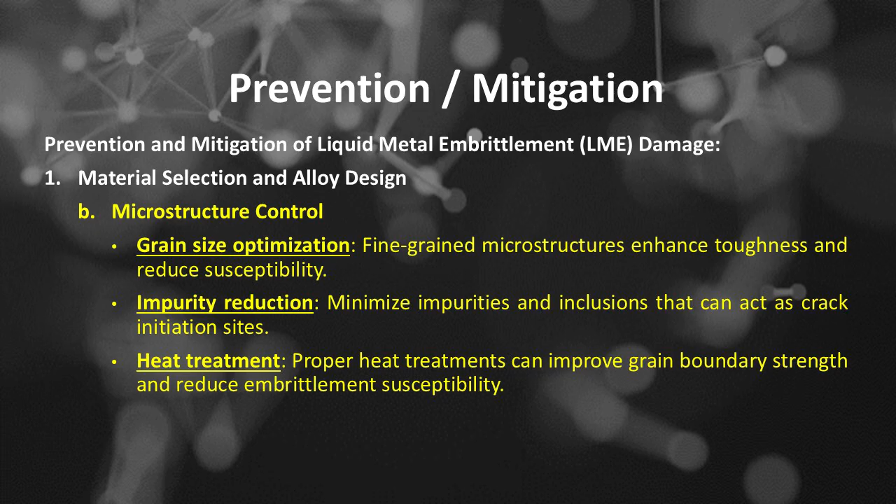Number C of material selection and alloy design is coatings and surface treatments, including protective coatings: apply corrosion-resistant or impermeable coatings, e.g., ceramic or nickel plating, to prevent liquid metal contact. Barrier layers use diffusion barriers to inhibit liquid metal infiltration along grain boundaries. This is part of prevention and mitigation of liquid metal embrittlement, or LME damage.

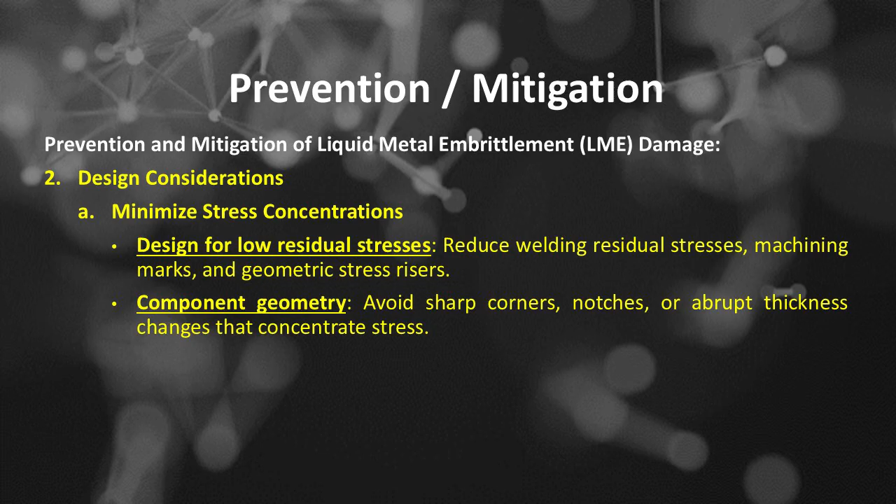Number 2 is design considerations, including A, minimize stress concentrations: design for low residual stresses, reduce welding residual stresses, machining marks, and geometric stress risers. Component geometry should avoid sharp corners, notches, or abrupt thickness changes that concentrate stress.

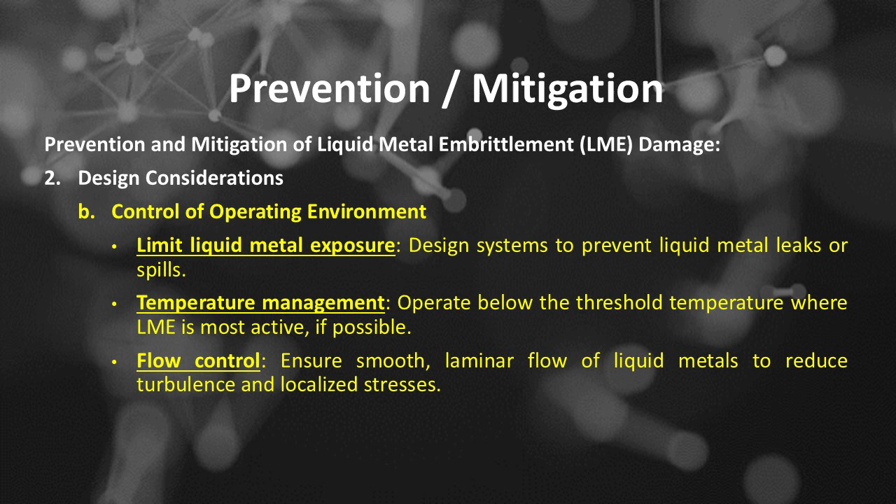Design considerations, B, control of operating environment, includes limiting liquid metal exposure by designing systems to prevent leaks or spills, temperature management to operate below the threshold temperature where LME is most active if possible, and flow control to ensure smooth, laminar flow of liquid metals, reducing turbulence and localized stresses.

Design considerations, C, structural redundancy: incorporate safety margins and redundant load paths to prevent catastrophic failure if embrittlement occurs. This is part of prevention and mitigation of liquid metal embrittlement, or LME damage.

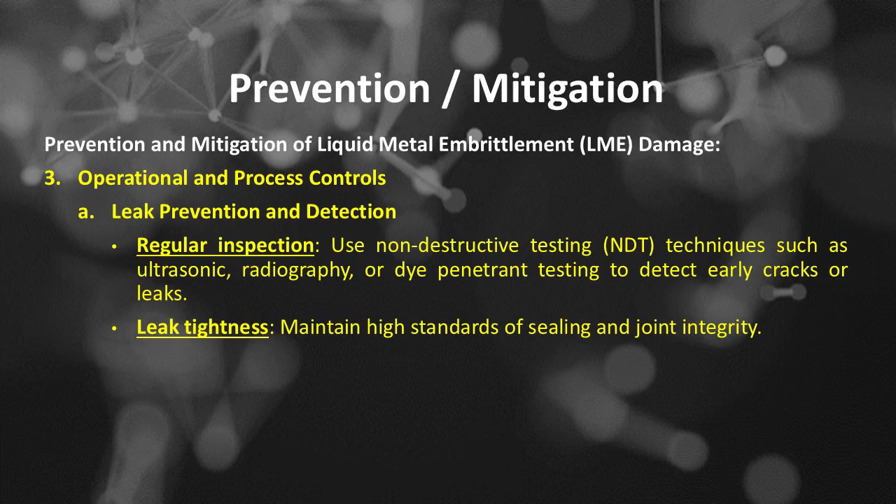Number 3 is operational and process controls, including A, leak prevention and detection: perform regular inspection using non-destructive testing, NDT, techniques such as ultrasonic, radiography, or dye-penetrant testing to detect early cracks or leaks, and maintain high standards of sealing and joint integrity.

Operational and process controls, B, environmental control, includes temperature regulation to maintain operational temperatures within safe limits, and chemical control using additives or corrosion inhibitors to reduce aggressive interactions with liquid metals.

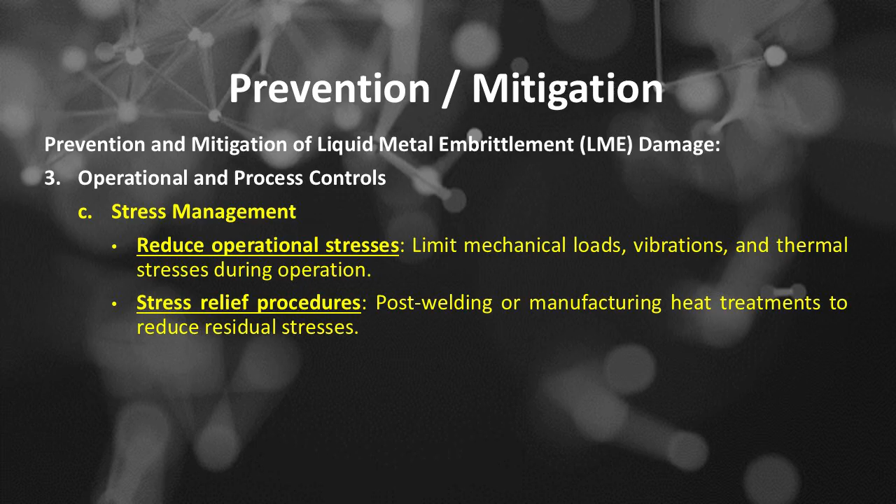Operational and process controls, C, stress management, includes reducing operational stresses by limiting mechanical loads, vibrations, and thermal stresses during operation, and applying stress relief procedures such as post-welding or manufacturing heat treatments to reduce residual stresses.

Prevention and mitigation of LME damage, number 4, maintenance and inspection, A, routine inspection: perform regular visual, ultrasonic, or other NDT methods to detect early signs of embrittlement or cracking, and use acoustic emission monitoring for real-time detection of crack growth.

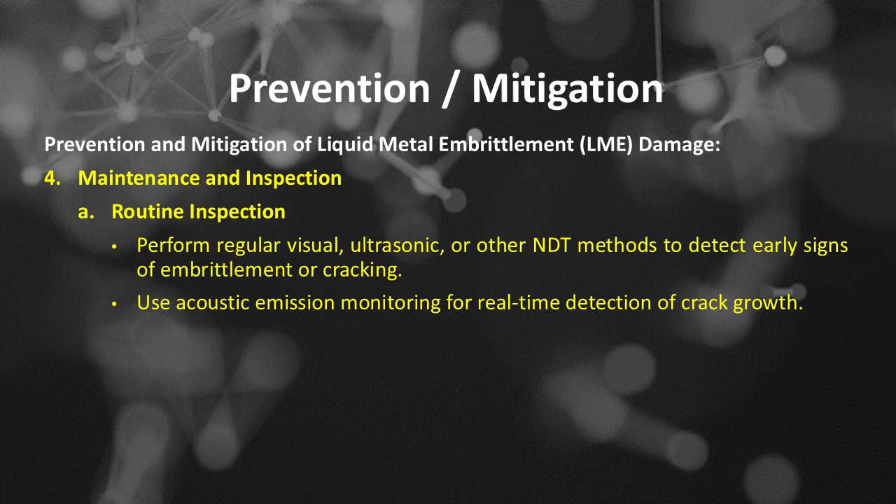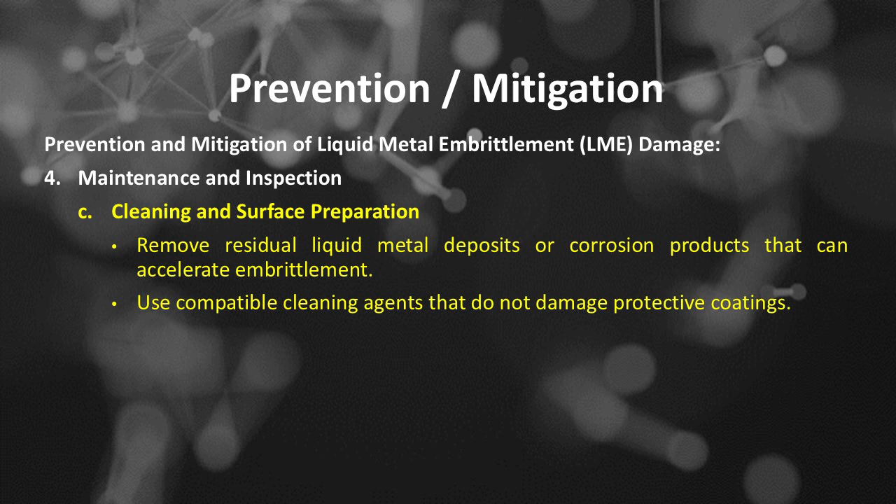Maintenance and inspection, C, cleaning and surface preparation: remove residual liquid metal deposits or corrosion products that can accelerate embrittlement, and use compatible cleaning agents that do not damage protective coatings. This is part of prevention and mitigation of LME damage.

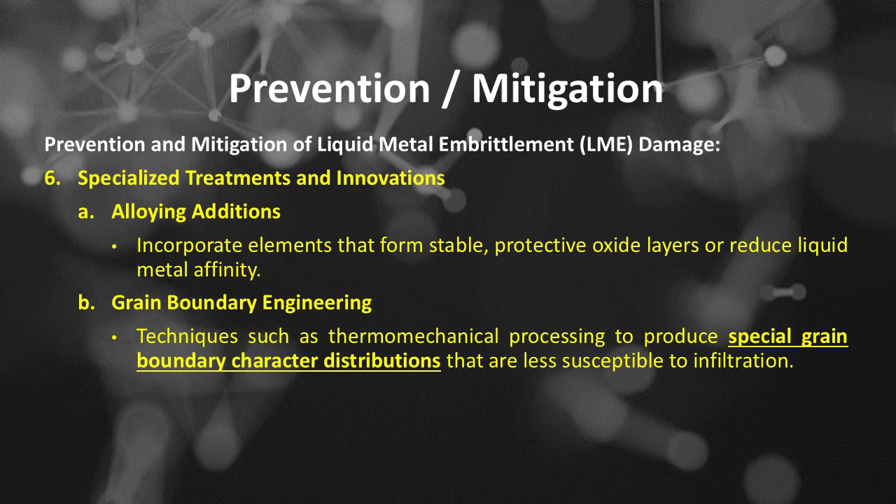Number 6 is specialized treatments and innovations, A, alloying additions: incorporate elements that form stable, protective oxide layers or reduce liquid metal affinity. B, grain boundary engineering: techniques such as thermomechanical processing to produce special grain boundary character distributions that are less susceptible to infiltration.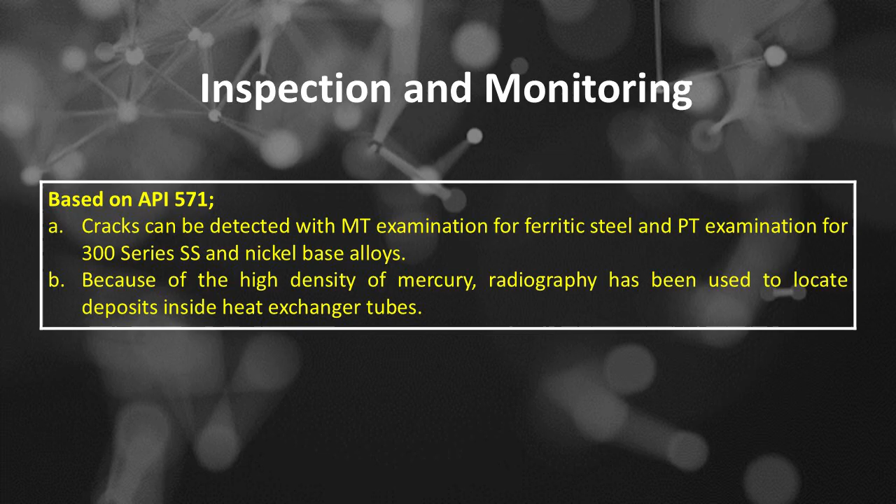Liquid metal embrittlement damage inspection and monitoring, based on API 571: A, cracks can be detected with MT examination for ferritic steel and PT examination for 300 series stainless steel and nickel-based alloys. B, because of the high density of mercury, radiography has been used to locate deposits inside heat exchanger tubes.

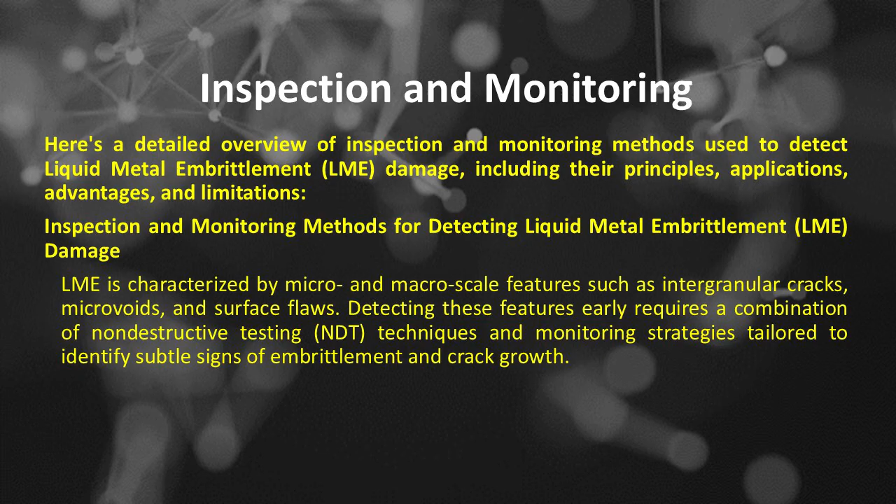Here's a detailed overview of inspection and monitoring methods used to detect LME damage, including their principles, applications, advantages, and limitations. LME is characterized by micro and macro scale features such as intergranular cracks, microvoids, and surface flaws. Detecting these features early requires a combination of non-destructive testing, NDT, techniques and monitoring strategies tailored to identify subtle signs of embrittlement and crack growth.

Inspection and monitoring methods for detecting LME damage, number 1, visual inspection. Its principle is direct visual examination of surface conditions using magnification tools. Application: visual inspection is used to detect surface cracks, corrosion products, discoloration, and surface flaws. It's suitable for accessible regions and in-situ inspections.

Visual inspection techniques include visual examination with the naked eye, magnifying glasses or portable microscopes, and remote video inspection systems. Advantages include being quick, inexpensive, and straightforward, good for identifying gross surface damage. Limitations include that visual inspection cannot detect subsurface or microcracks.

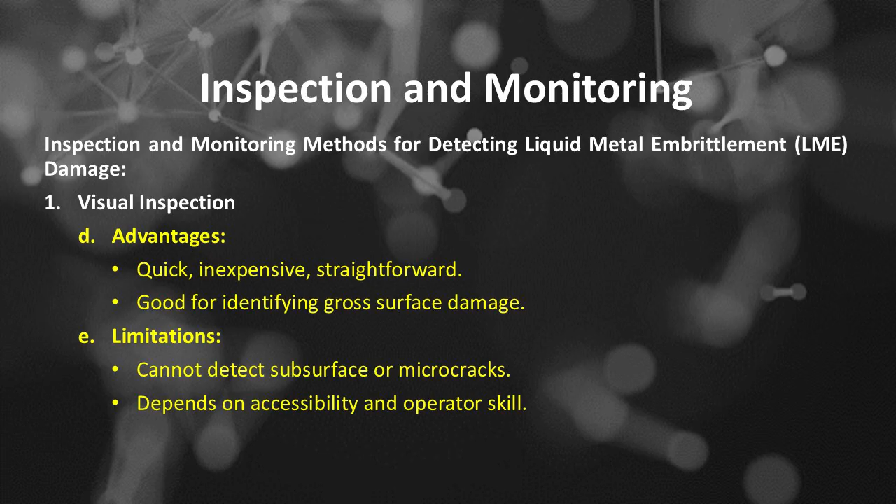It depends on accessibility and operator skill.

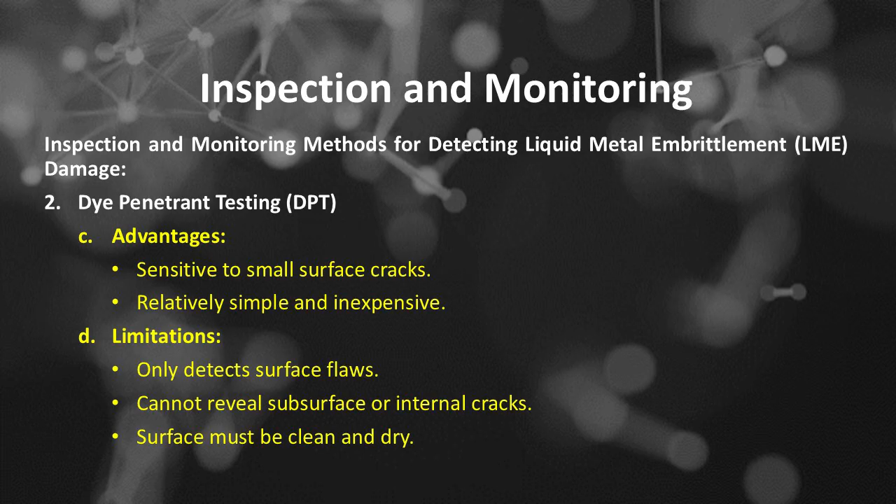Inspection and monitoring methods, number 2, is dye penetrant testing (DPT). Its principle is surface breaking cracks or flaws are revealed by applying a liquid dye penetrant that seeps into cracks. After excess removal, a developer makes the dye visible. Its application is to identify surface microcracks, especially intergranular cracks along grain boundaries, suitable for materials with smooth, clean surfaces. Advantages include sensitivity to small surface cracks, and being relatively simple and inexpensive. Limitations include only detecting surface flaws, cannot reveal subsurface or internal cracks, and the surface must be clean and dry.

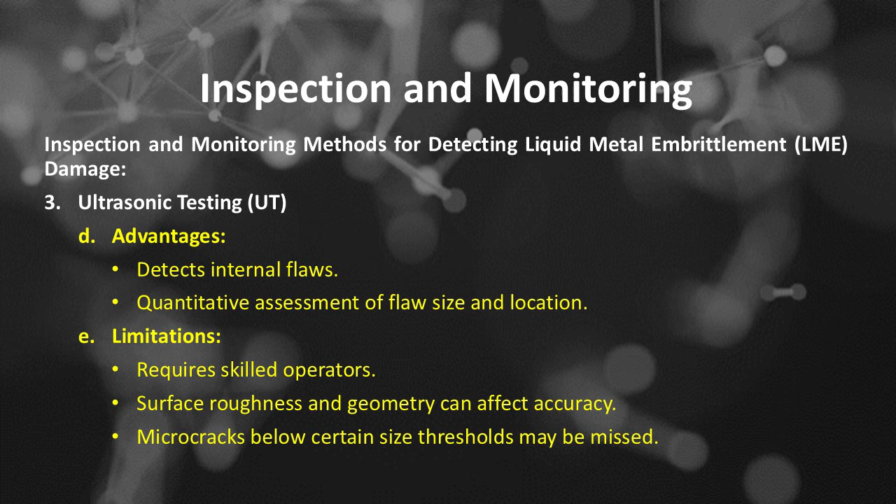Inspection and monitoring methods, number 3, is ultrasonic testing (UT). Its principle is that sound waves detect internal cracks, especially intergranular microcracks, suitable for thick or complex geometries. Techniques include the pulse echo method and phased array ultrasonics. Advantages include detecting internal flaws and quantitative assessment of flaw size and location. Limitations include requiring skilled operators, surface roughness and geometry can affect accuracy, and microcracks below certain size thresholds may be missed.

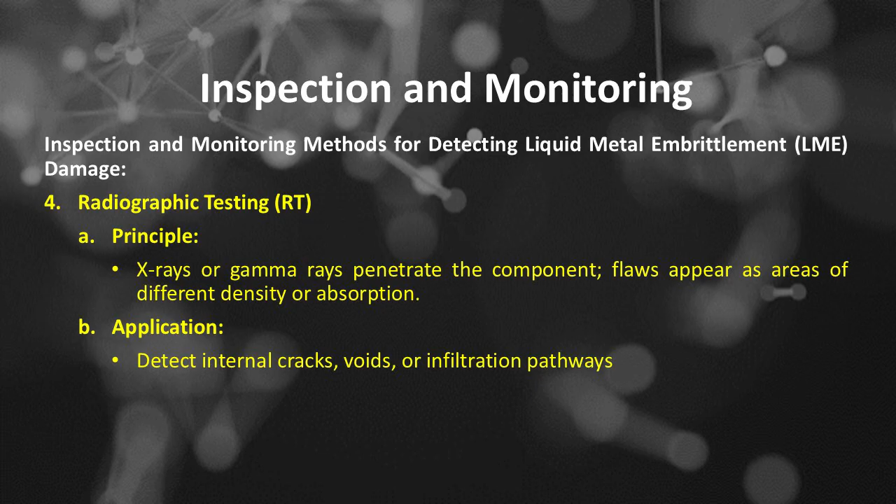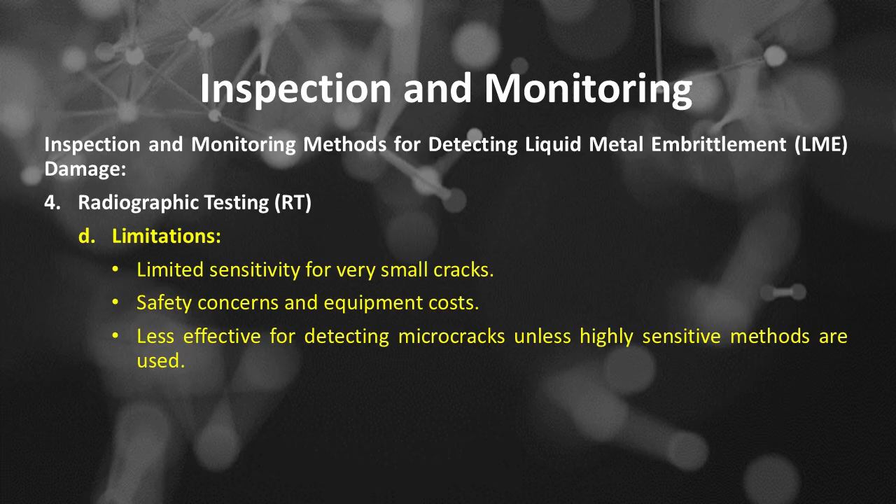Inspection and monitoring methods, number 4, is radiographic testing (RT). Its principle is X-rays or gamma rays penetrate the component, and flaws appear as areas of different density or absorption. Its application is to detect internal cracks, voids, or infiltration pathways. Advantages include providing a permanent record of internal features and being good for complex geometries. Limitations include limited sensitivity for very small cracks, safety concerns and equipment costs, and being less effective for detecting microcracks unless highly sensitive methods are used.

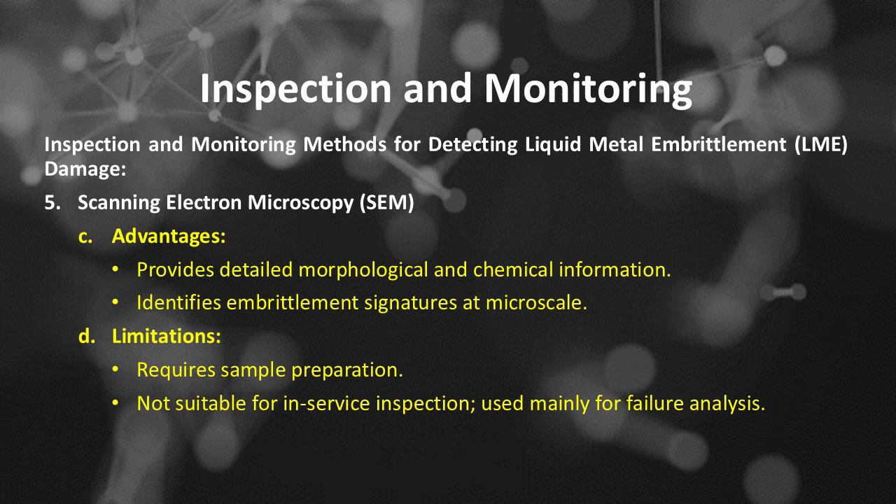Inspection and monitoring methods, number 5, is scanning electron microscopy (SEM). Its principle is high-resolution imaging of fracture surfaces or microstructural features. Its application is to examine fracture surfaces for characteristic LME features such as intergranular fracture, microvoids, or liquid metal residues, with microanalysis using EDS (energy dispersive X-ray spectroscopy) to identify penetrated metals. Advantages include providing detailed morphological and chemical information and identifying embrittlement signatures at microscale. Limitations include requiring sample preparation, not being suitable for in-service inspection, and being used mainly for failure analysis.

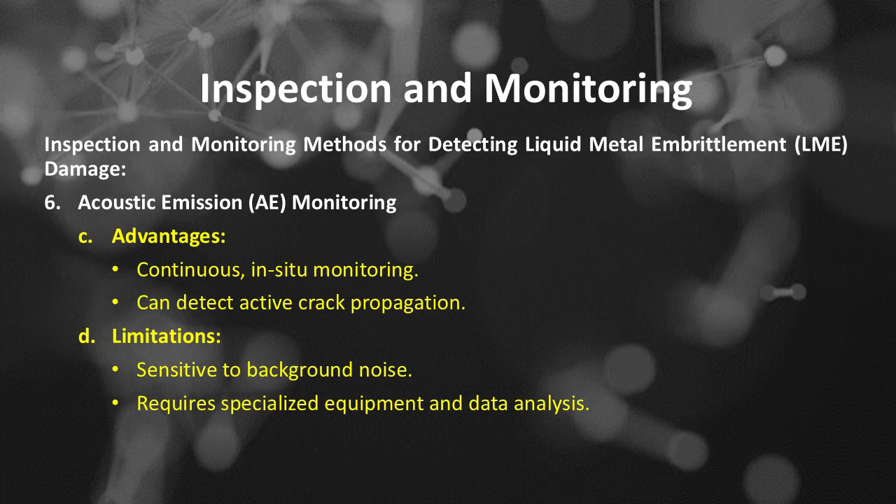Inspection and monitoring methods, number 6, is acoustic emission monitoring. Its principle is detecting transient elastic waves generated by crack initiation and growth during service. Its application is real-time monitoring of active crack growth, useful for early detection of embrittlement-induced cracking under operational conditions. Advantages include continuous, in-situ monitoring and the ability to detect active crack propagation. Limitations include sensitivity to background noise and requiring specialized equipment and data analysis.

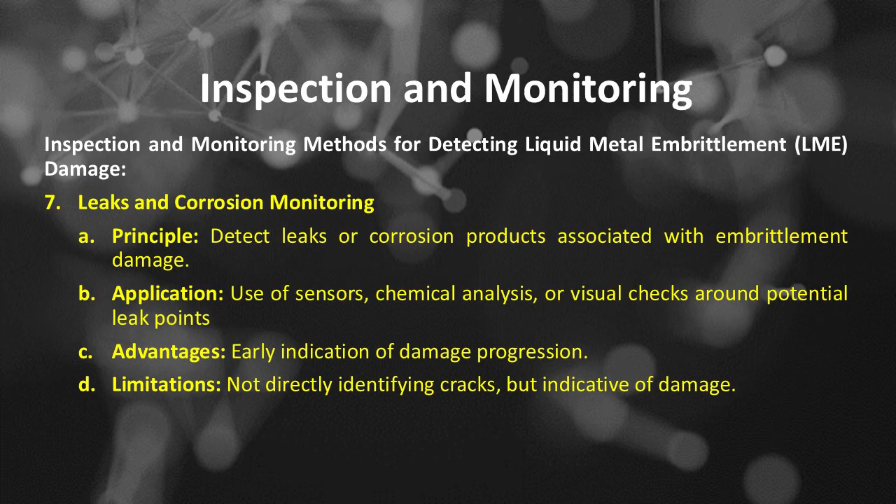Inspection and monitoring methods, number 7, is leak and corrosion monitoring. Its principle is to detect leaks or corrosion products associated with embrittlement damage. Its application is the use of sensors, chemical analysis, or visual checks around potential leak points. Advantages include early indication of damage progression. Limitations include not directly identifying cracks, but being indicative of damage.

Inspection and monitoring methods, number 8, is advanced and emerging techniques. These include: number 1, phased array ultrasonics, for improved flaw imaging and detection sensitivity; number 2, digital radiography and computed tomography (CT), for high-resolution 3D imaging of internal damage; number 3, magnetic particle inspection (MPI), for ferromagnetic materials to detect surface and near-surface cracks; and number 4, infrared thermography, which detects temperature anomalies due to crack-related heat flow.

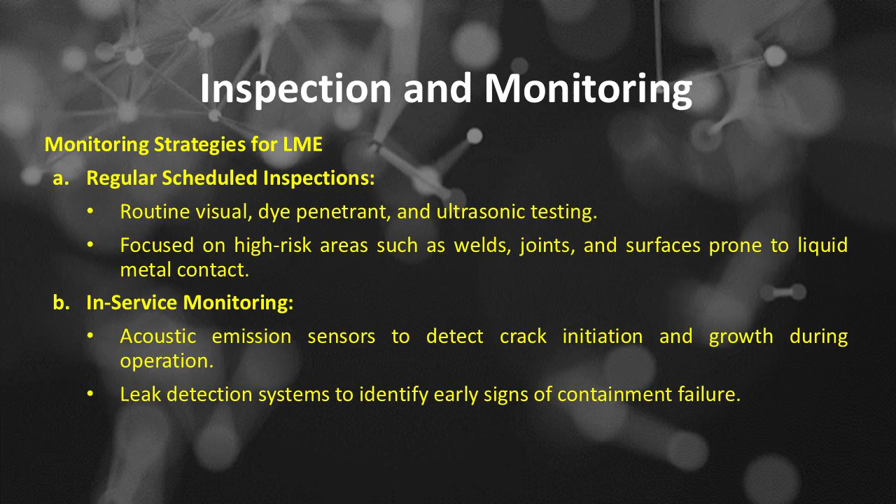Monitoring strategies for liquid metal embrittlement include: number 1, regular scheduled inspections, with routine visual, dye penetrant, and ultrasonic testing focused on high-risk areas such as welds, joints, and surfaces prone to liquid metal contact. Number 2, in-service monitoring, using acoustic emission sensors to detect crack initiation and growth during operation, and leak detection systems to identify early signs of containment failure. Number 3, corrosion and leak sensors, using chemical sensors, pressure monitoring, or flow sensors to detect leaks of liquid metal. Number 4, structural health monitoring, integrating sensors and data acquisition systems for real-time damage assessment.

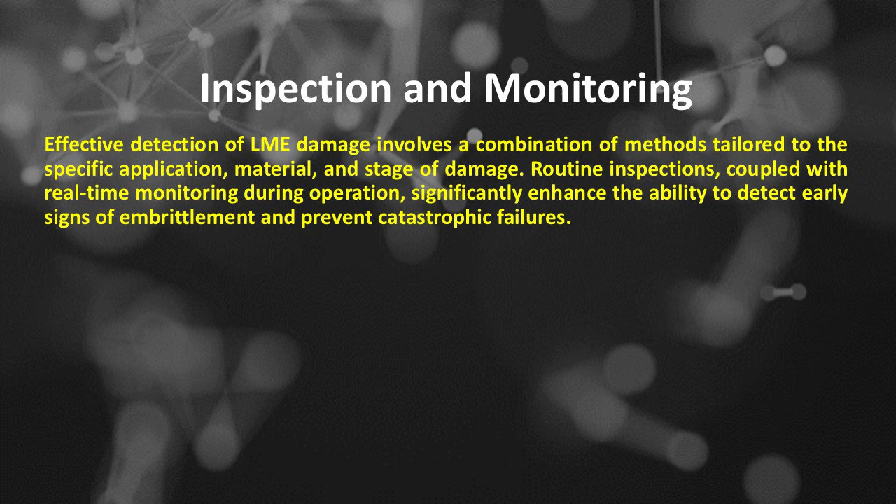Effective detection of LME damage involves a combination of methods tailored to the specific application, material, and stage of damage. Routine inspections, coupled with real-time monitoring during operation, significantly enhance the ability to detect early signs of embrittlement and prevent catastrophic failures. Thank you.